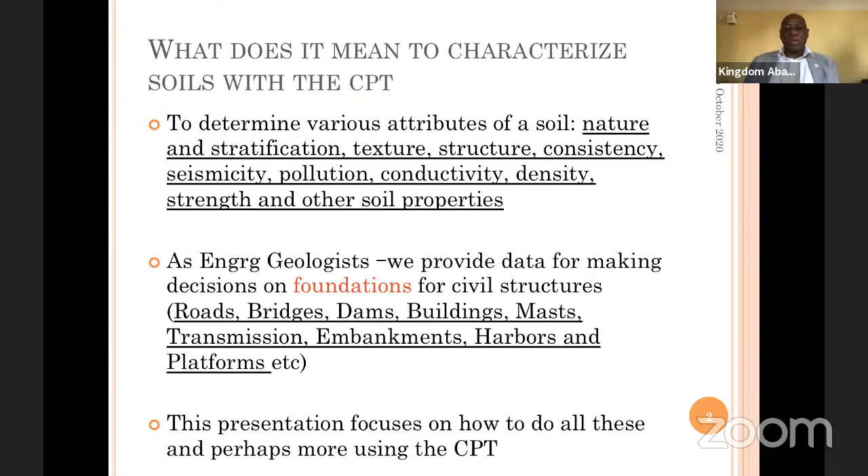Now, the cone penetrometer itself has evolved over time. The initial cone penetrometer was invented by the Dutch many years ago. It began with a 2.5 ton penetrometer. The tonnage represents the pushing capacity. The 2.5 ton evolved to 5 tons, to 20 tons, and today we have 40 tons. These tonnages reflect the push capacity as well as the uplift resistance.

Now, the initial cones that were first developed could only read the tip resistance, but subsequent ones, with evolution over time, better cones with better resolution and more flexibility in the probe and the parameters measured came on board. We were able to move on to register the cone tip as well as the sleeve friction, and then subsequently the pore pressure was added. Presently, there are cones that can read up to 7 or 8 different parameters.

The cone penetrometer and its advanced forms, such as the piezocone and the seismic cone, have extensive, wide-ranging applications. However, the applications are limited primarily to softer soils, but with increasing pushing capacity, they are now able to probe into stiff or very stiff soils and even soft rocks.

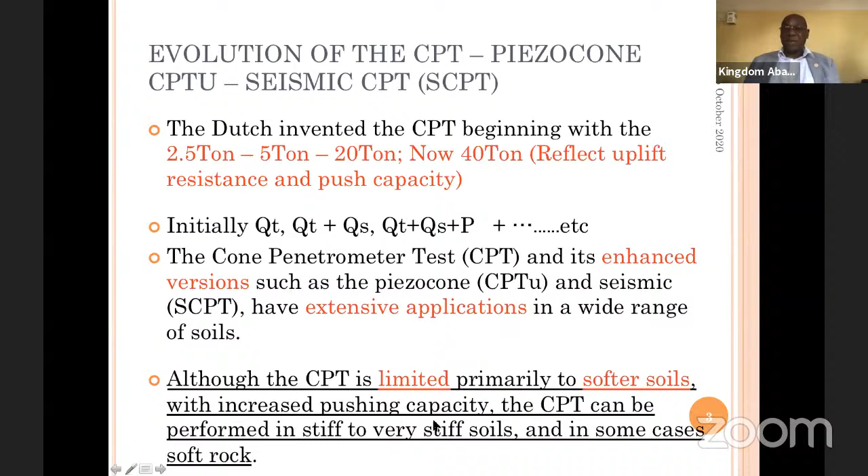Now, the cone itself, this is a schematic of a typical cone. It consists of a cone whose cone area is 10 centimeters square, as a cone tip whose angle is about 60 degrees. In Russia, they have cones whose cone angle is 90, and I think that differs. It depends on the manufacturer's own specification.

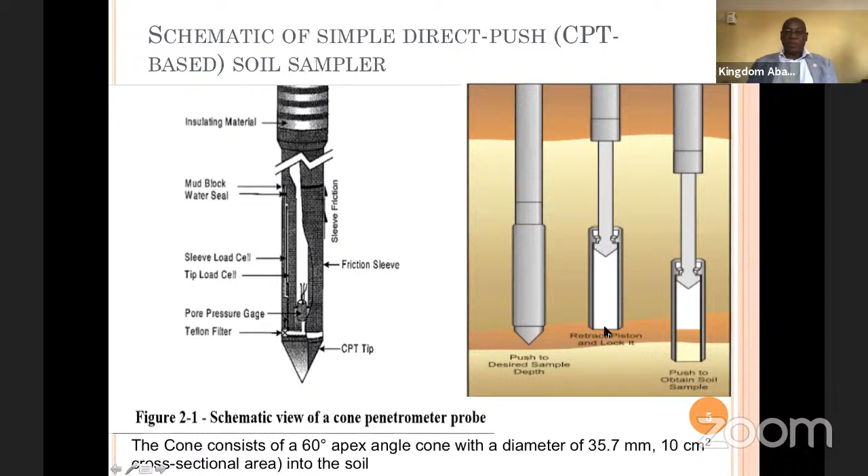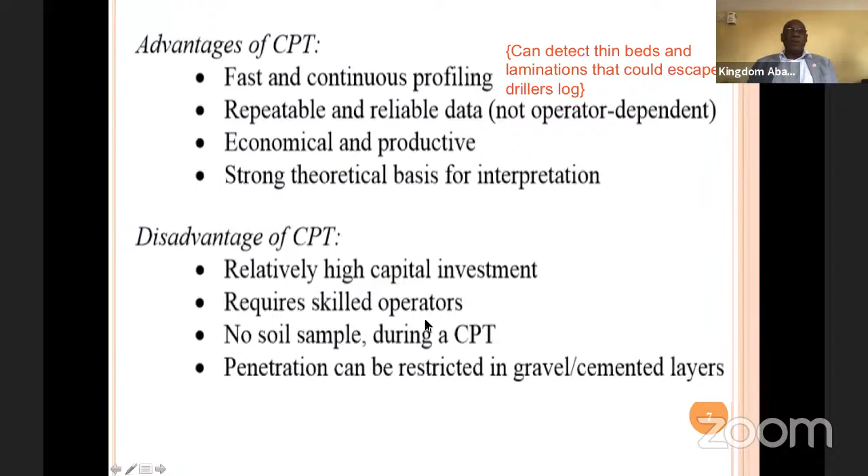Now, let me quickly go on to the test procedure. The cone penetrometer consists of the cone, the friction sleeve, and the sensor, and the data acquisition system, which I have shown graphically.

It is pushed down at a constant rate of 2 centimeters per second. The resistance of the soil at the tip, at the sleeve, and soil and pore pressure are recorded. Those are the major traits. Every electric CPT or piezo cone is able to register these 3 parameters. These are the primary parameters from which all other parameters are derived.

Today, we have several other sensors which can be fitted into a cone. You can have a thermometer fitted into a cone to register geothermal properties, temperature. You can have geophones or seismometers fitted into it to register arrival time of waves. I'll show further examples as to how that can be used and interpreted. You can also have pressure meters, cameras which rely on visible light to capture the state of things, resistivity, pH, oxygen, redox potential, and several others.

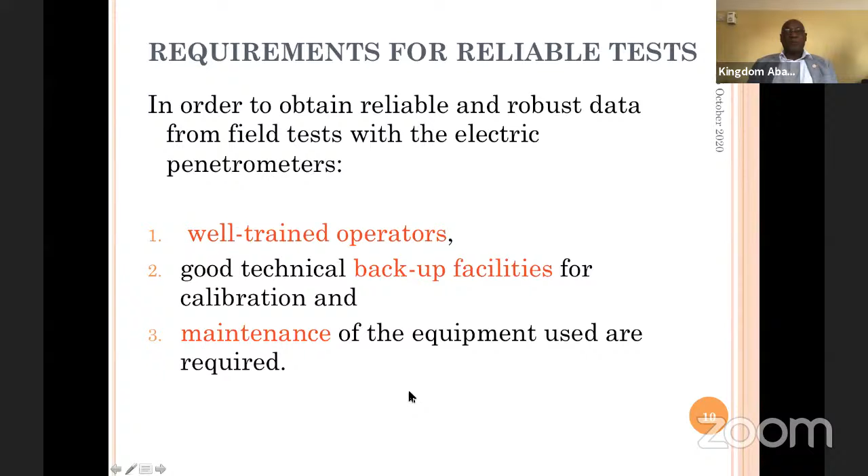Now, the requirements for reliable tests. First, you must have a well-trained operator. There is no alternative to this. You must also have backup facilities, and you must also have a proper maintenance profile.

You'll find that when a CPT probe or sounding encounters a very hard layer, you meet refusal to penetration. What do you do? It's wasteful when CPT encounters an unpenetrable layer at a very shallow level. There are two options open to us. The first is the pre-drilling option: when you encounter a stiff layer, you pre-drill, go beyond that layer, and then continue your sounding. It's possible that the thickness of the

Additionally, when you pre-drill, you create some kind of disequilibrium with the water pressure. This process requires that you fill the hole which you have pre-drilled with water, in order to ensure that pore pressure, you have piezo element saturation, to ensure that the pore pressure reading remains accurate.

There are cases where rather than pre-drill, you will have to use a dummy cone of a slightly larger diameter, such as I showed before, to widen the hole, and that will serve effectively as a friction reducer. Okay, now depth of penetration.

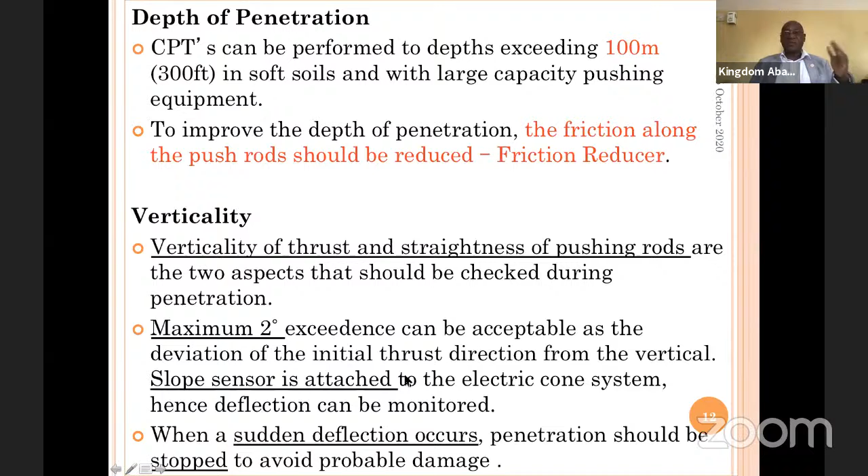Now, the rate of penetration is dependent on whether you are measuring pore pressure or not, because pore pressure needs time to equilibrate for you to get an accurate reading. So the sounding speed is actually 2 cm per second, that is 20 millimeters per second. If you are not measuring pore pressure, you have wider flexibility, plus minus 20 millimeters per second, plus minus 25 percent. But if you are to measure pore pressure, you have a stricter window of 10% to operate with.

Now, to avoid the effect of pore pressure dissipation, sounding has to be continuous. When you pause in sounding, pore pressure dissipation occurs, which means that if you're not sounding continuously, the pore pressures you're obtaining may have some difficulties.

Now, frequency of sounding: you have to take account of the interval. If you want to capture the properties of thin layers of soil, then your interval of data capture must be smaller than the minimum thickness that you have to capture.

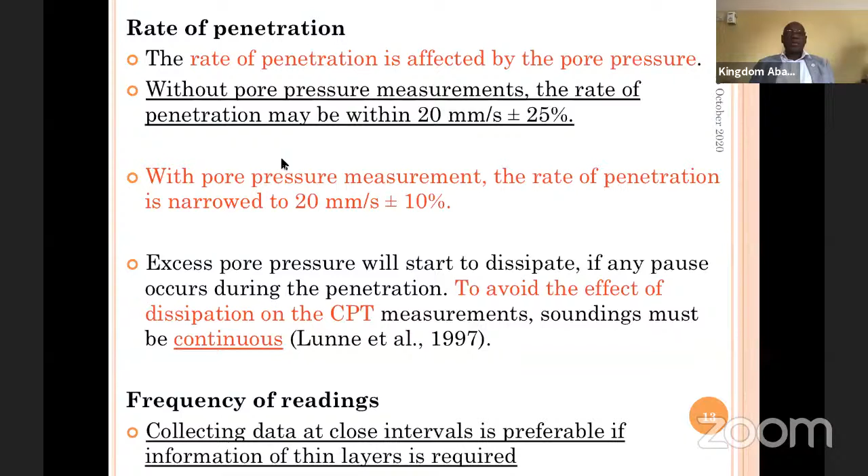Data acquisition using the CPT essentially gives you cone tip resistance, sleeve friction, pore pressure. Your electric CPT, your piezo cone, also captures verticality, and you also have the ability to capture shear wave velocity, conductivity, and several other probes, as long as they are implanted on the probe. The number of readings taken must be adequate to obtain the data.

Now, using the 2.5 ton equipment, data has been presented more like a table, which doesn't really give you much information. You have depth, cone tip resistance, and then the total cone, including the tip as well as the sleeve. This hardly conveys any information using the 2.5 ton, for example.

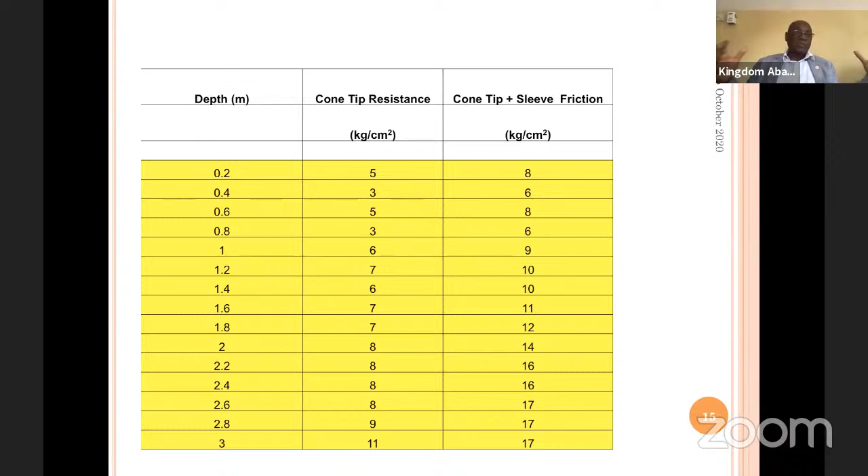This presentation is about optimizing the 2.5 ton, which has been found very useful, particularly in areas of low infrastructure penetration, where you hardly have roads, and yet you have to take the equipment to the appropriate site and run the test. Now, how do you present data using this kind of information?

Of course, you would plot your pore pressure versus depth. You can also plot your sleeve friction versus depth. There are graphical ways in which this can be done. You can also have your differential pore pressure versus depth. Basically, a data presentation in CPT would look something like this.

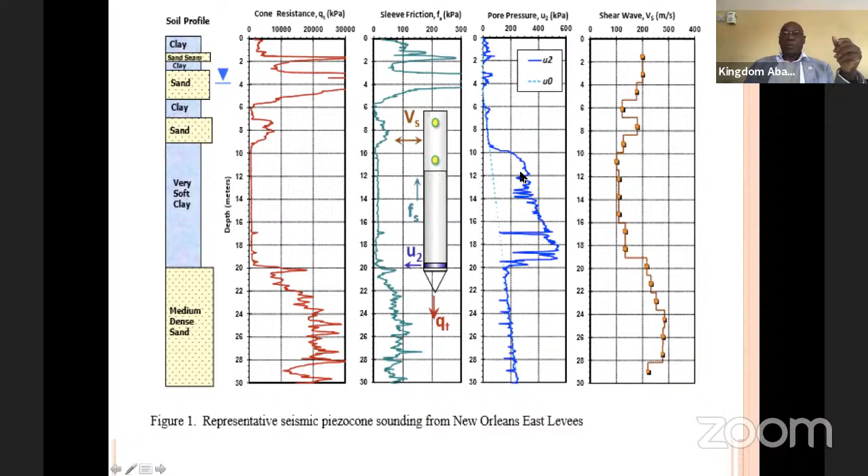The methodology for the seismic cone is fairly simple. In the case of a seismic cone, you have your cone sounding here. You have an energy source generated with a hammer connected to the trigger, from a fixed distance to the probe, to the cone. When you sound to this level, you trigger the sound.

The energy is transmitted, and because the cone has a listening device, a seismometer, it records the arrival time. You know the distance from the source to the cone, and you also know the depth, so you are able to calculate this distance. Knowing the arrival time, the travel time of the signal, you are able to determine the shear wave velocity.

This helps you to determine your shear modulus, and from the shear modulus, you're able to determine your dynamic modulus. Prior to the development of the seismic cone, shear modulus was determined essentially by drilling two boreholes: in one borehole you put a source, in the other you put a listening device—that's the crosshole seismic method.

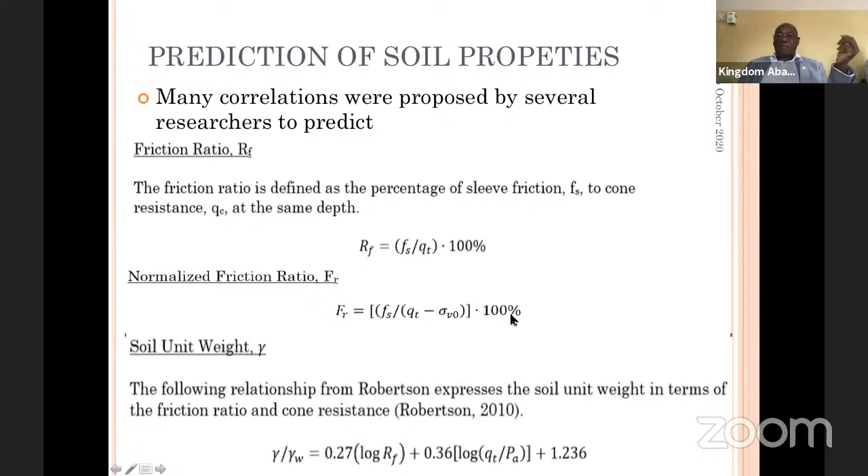You can also determine unit weight, essentially by this relationship developed by Robertson, 2010. In this graph, for example, there's a relationship between sleeve friction and unit weight. This correlation involves over 1,000 samples, with a coefficient of determination of about 0.6. Different soil types have been embedded into this, with different colors representing different soil types. There's a linear correlation here, and also one that is more curvilinear, so different degrees of reliability. Okay, moving on.

How are you able to identify the soil in a cone penetrometer test, and how does that come into the picture? In 1965, Begemann evolved a way of characterizing the soils encountered by the cone penetrometer, using essentially friction ratio.

The reason is that if the friction ratio is between 1.2% to 1.6%, that soil is most likely to be coarse sand. And if the friction ratio is between 3.2 and 4.1%, that soil is either clay or loam, loamy soil especially. And for peat, you have friction ratios that are greater than 7%.

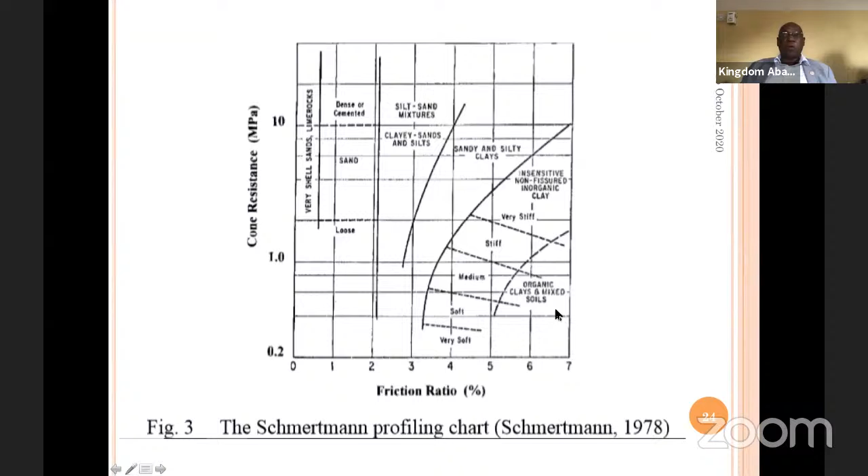Now I'll move on to the soil behavior type index. This index is thought of as a representative when you combine the cone resistance and the friction ratio. Robertson 1990 produced some concentric circles which corresponded with the different soil types, which he tagged the soil behavior type index, given numerically by this expression. These are like concentric circles. I won't dwell, because of time, I'll move a little faster.

Now, using the method, here is a comparison of the methods: the soil classification using Robertson and the improvement they made in 1990 against that of 1986, and the common soil behavior types registered against it. Perhaps spend a little more time when the slides are forwarded.

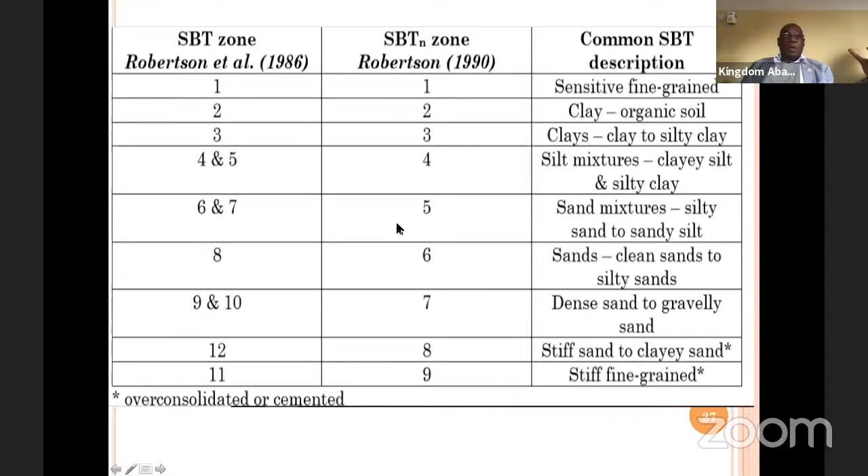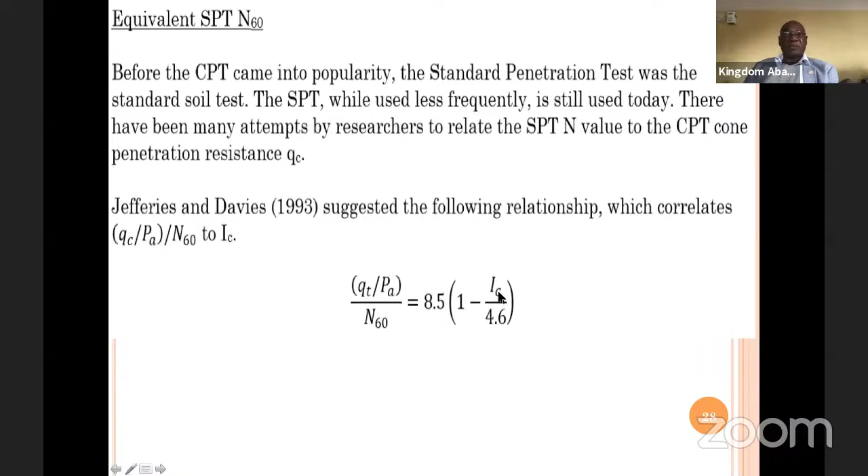Now, Jefferies and Davies in 1993 introduced the elements of standard penetration test, that's the SPT, which has a much longer history than CPT. They integrated the CPT results with the SPT together with the soil behavior type index to arrive at some soil classification, which he then compares with Robertson 1986. Using the elements of SPT, SPT-N60, you have the different soil types identified here corresponding to the soil types developed by Robertson 1986.

You can achieve further improvement by expanding the parameters used for determination of different soil types. Shear wave velocity can be determined empirically in two different ways. Much of the predictions made by CPT are empirical, based on some theoretical background.

For example, Robertson 2009 gave this expression for the prediction of shear wave velocity, in which this coefficient is given by this. Mayne, in 2006, also determined shear wave velocity using this relationship. I think the preference depends on conditions under which they can be applied, depending on the environment in which the field sounding of the CPT is carried out.

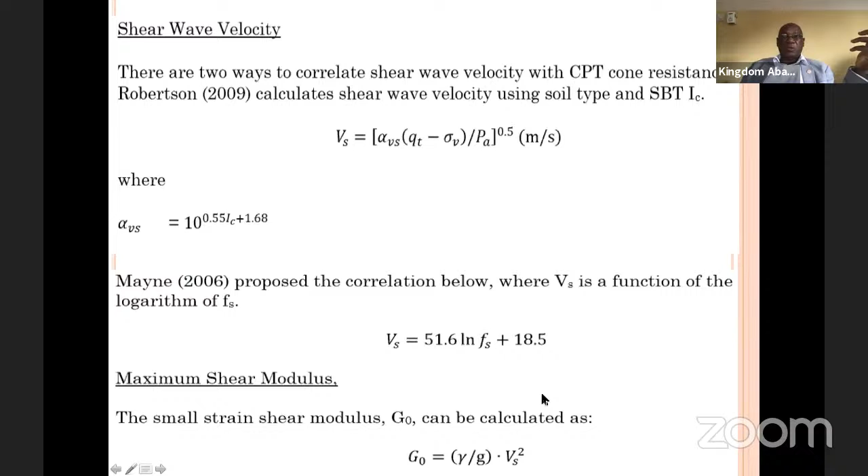Shear modulus essentially is just fitting the shear wave velocity you have determined from the CPT into a petrophysical equation. In this equation, G0 is your shear modulus, so to say.

Hydraulic conductivity can be determined to a less reliable degree. Even so, for conditions where the soil behavior type index, SBTI, is less than 3.27, you can use this. For all other conditions, where the soil behavior type index is more than 3.27, you can use this.

In fact, last year in Korea there was a further development which gave much higher reliability of using the CPT to determine permeability. The science is evolving, and the reliability of prediction is increasing with further research.

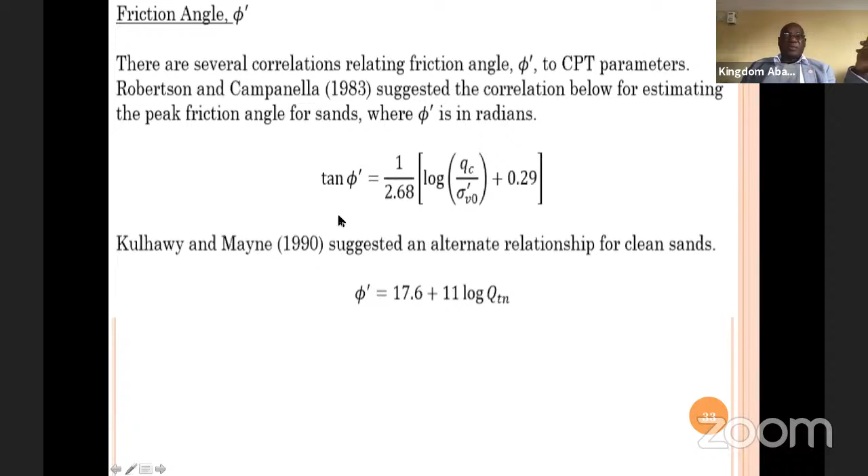Relative density was predicted by Jamiolkowski in 2001 using this relationship. I have to move pretty fast.

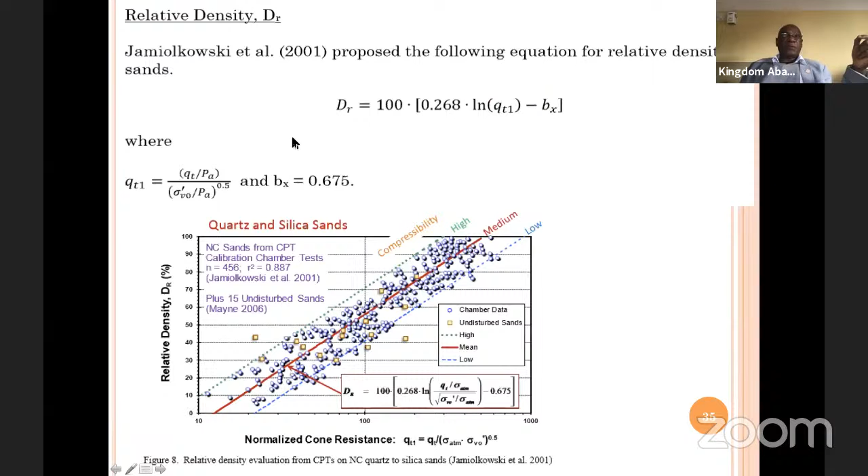We have gone further to look at how best to predict shear strength. In this relationship, you have undrained strength plotted against tip resistance for both mechanical and electrical cones, and you'll see that there is significant fit, with a coefficient of correlation of 0.92. I would consider the 193 samples.

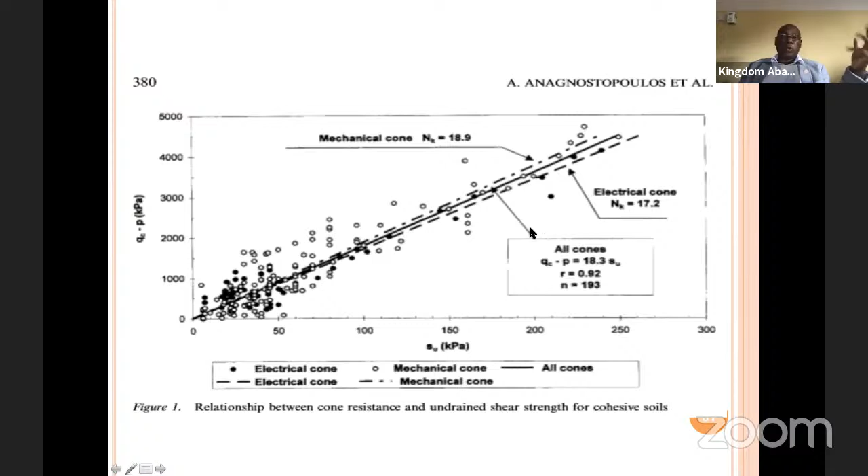In this relationship, the slope of the graph is essentially your cone factor. For mechanical cones, the cone factor is 18.9, whereas for electric cones, the cone factor is about 17, which means the electrical cones showed more sensitivity, so to say.

Now, for soil sensitivity, the sensitivity here is a ratio of the undrained strength against the sleeve friction, which is the remolded strength, more or less.

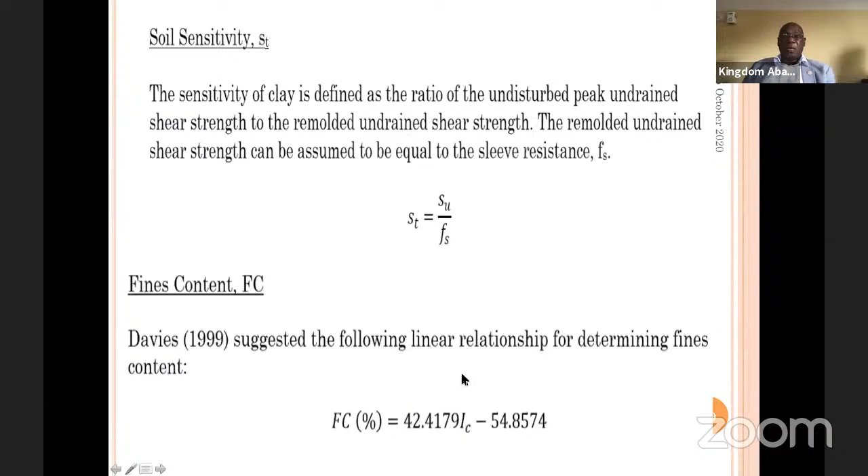You can also use the CPT to determine the fines content using the soil behavior type index, SBTI, giving an estimate of the fines in the soil. You even have Young's modulus, which is determined in this way.

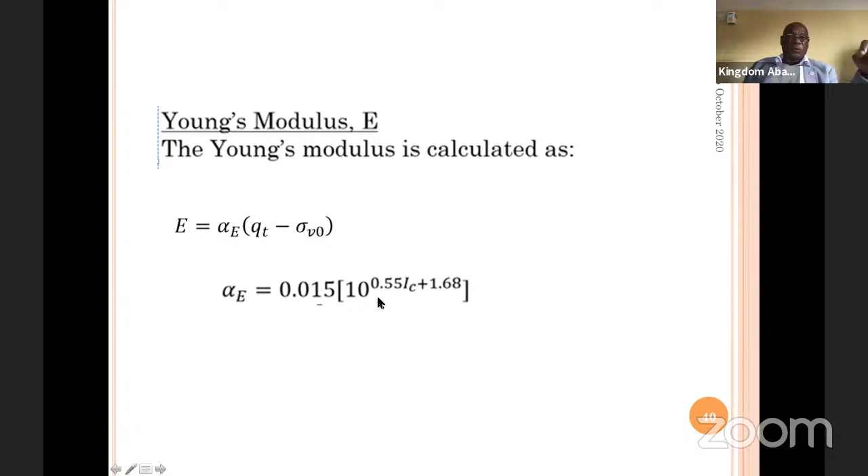Here you have that the cone tip, you subtract the overburden pressure from the cone tip multiplied by this coefficient, which is given by this, and the soil behavior index is also a parameter here, just as you have this. So the cone penetrometer parameters are increasingly coming up for many parameters. It means that because they are there, knowing their value, you can retrospectively determine those parameters.

Even for California bearing ratio, CBR, which is a parameter required for road sub-base and subgrade, the CBR is related to allowable bearing pressure, which is related to the undrained strength, which can be determined from the cone penetrometer. So using the cone penetrometer by extension, you can determine your CBR to some degree.

Additionally, from the cone penetrometer you can also determine, to some degree - it may not be highly reliable - your mean particle sizes. This is the work done by Robertson et al. 1983, and you can see the degree of correlation here. It's as high as 0.82.

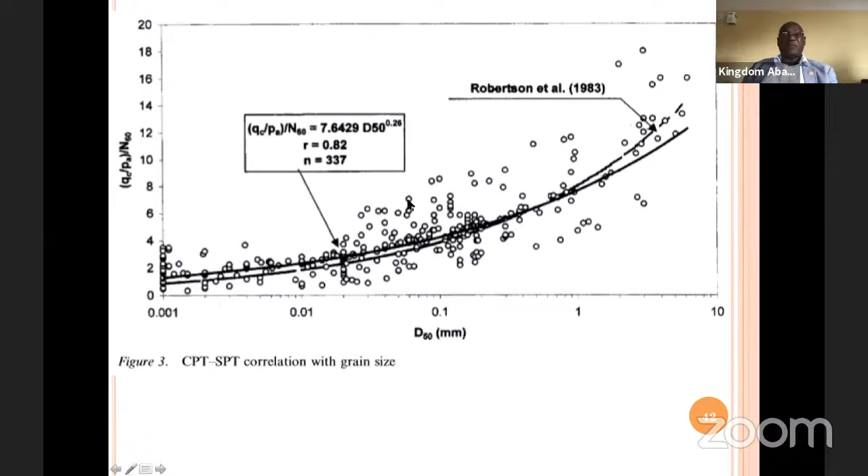So if you have your friction ratio, you can predict your particle size distribution to some degree. You can determine your mean size, not all the particle size parameters. And soil compressibility, which is...

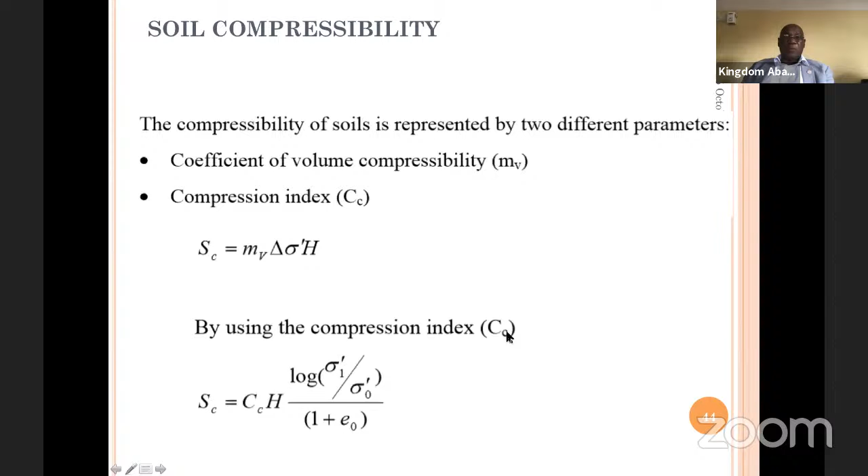essentially knowing your coefficient of volume compressibility or your compression index, you're able to determine settlement using this equation, which if you have used the compression index, the equation will transform to this essentially.

And using the constrained modulus, which is the parameter determined by the CPT, the constrained modulus is just an inverse of the coefficient of volume compressibility. So if you feed it into that equation which I have shown earlier, just by replacing this with the constrained modulus, you are able to also obtain a settlement.

This is the stress increment. This is the thickness of the compressible layer you are considering. So there are different methods to estimate compressibility settlements.

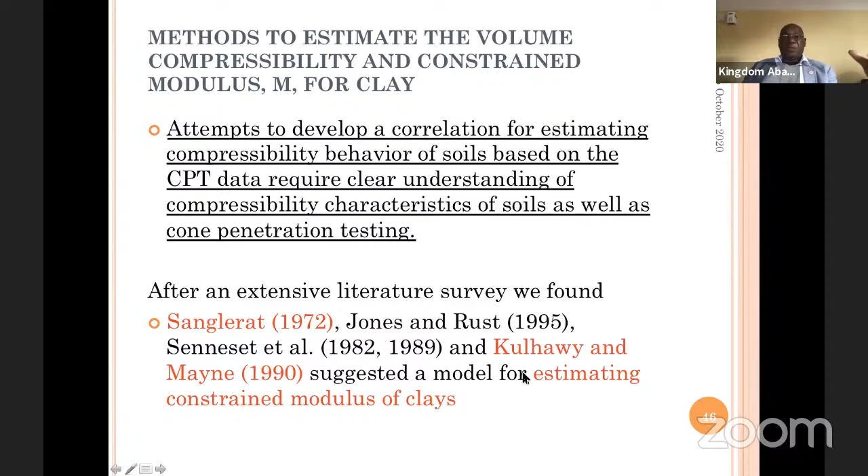So if you know your cone tip resistance, you're able to select your appropriate coefficient, and you can get your constraint modulus. The constraint modulus can also be determined using this relationship, and this is by Kulhawy and Mayne. It's also a very simple linear relationship.

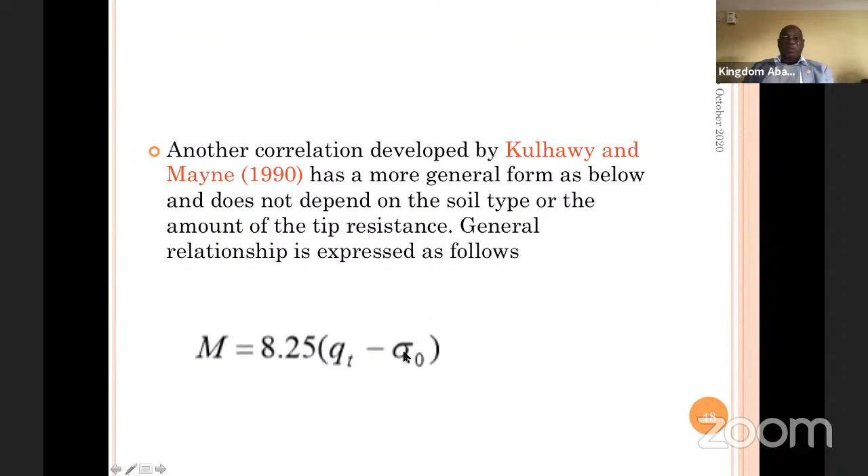In this relationship, this is your overburden pressure. You can also determine your coefficient of consolidation in the horizontal direction because the cone penetrates horizontally, and you're able to determine this, and this determines the rate of settlement to some degree.

Now, how is all of this applied? First is the application for bearing capacity. You're all familiar with the Terzaghi basic bearing capacity equation, which gives you this.

Here, the thing here is your undrained cohesion, which you can determine using the CPT by this relationship. Here, the N is the cone factor, and if you have undrained conditions, it means that your bearing capacity factor gamma here is going to be 0. So you are just considering these two parameters essentially.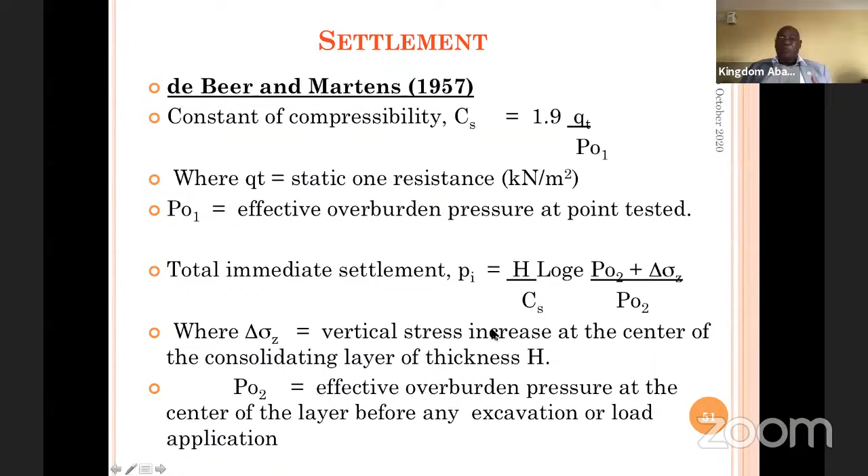So essentially, you can retrofit this into the equation for settlement, and then in place of the compressibility, you can substitute this, and then you integrate it across the depth of a sounding, and in that way, you're able to obtain your settlement computation. I'll show you the example.

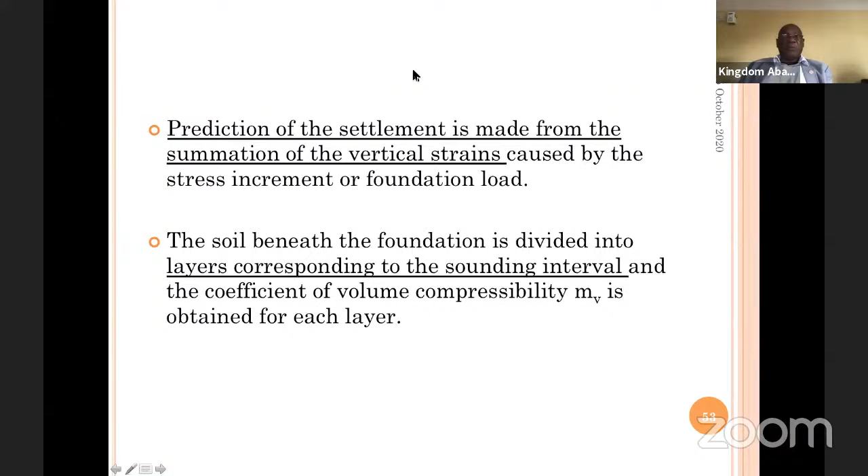If you have used the 2.5 ton penetrometer, you'll recall that it does not have a pore pressure cell, so you don't measure pore pressure. However, you can assume hydrostatic pressure distribution from the point at which the groundwater table is encountered. For us that holds true because artesian conditions in the delta are very few and far between, except for much deeper horizons where you're concerned with water supply. But basically, most of our hydrostatic conditions follow normal hydrostatic pressure distribution.

Using these parameters and the 2.5 ton penetrometer, I have this case history to report, where you have tip resistance, sleeve friction, a friction ratio, and the indicative soil behavior type. This is using conditional formatting on Excel. These things are generated using Excel.

Using the relationships I've shown, you're able to generate a profile of the sounding for the undrained strength. You're able to generate your allowable bearing pressure if designing for foundation, your unit weight profile with depth, your angle of internal friction with depth, and determine your settlement distribution.

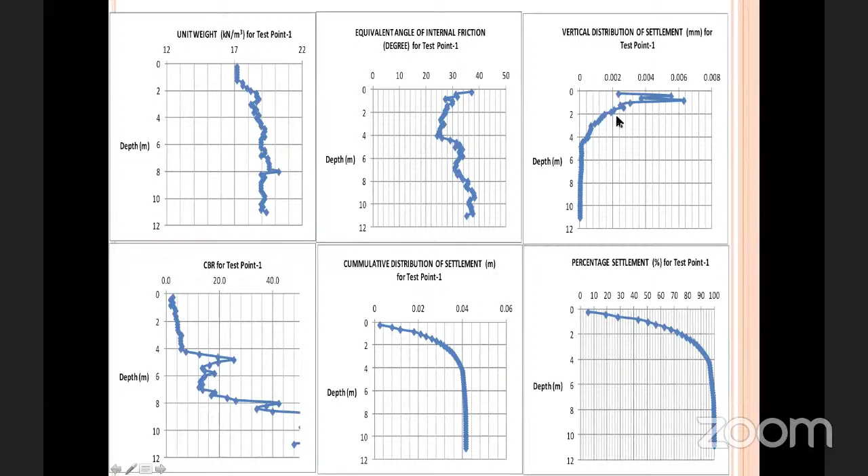Now, Professor Abam, conclude. Yes, I'll conclude shortly. This is very interesting because here you are able to see that so much more settlement is contributed.

For the different methods of settlement computation, I have done a comparison to show that any of the methods can be used, but there are margins of error. Here also I've looked at the stress distribution from a load on the surface of the ground. This will give you the stress distribution against allowable bearing pressure, and this can help you determine the depth of embedment of your shallow foundation.

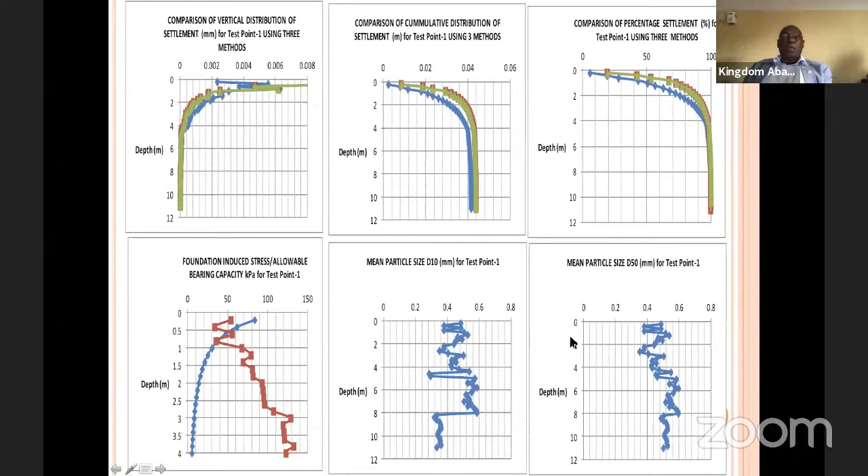For particle size distribution, these have been shown. This is a scenario where you have 1, 2, or 3-story buildings. The stress induced by these buildings is given by these lines, whereas the allowable bearing pressures are given by these other lines for different factors of safety. This helps you choose, depending on the factor of safety you want to operate with, and it helps you choose your depth of foundation.

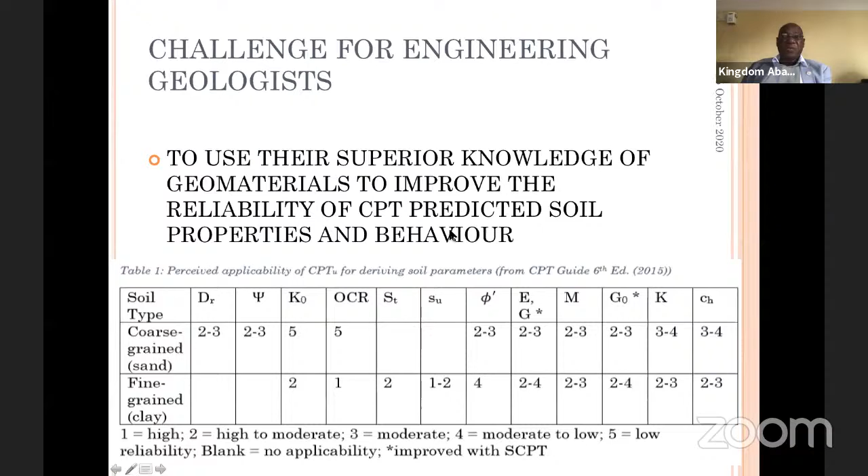Now lastly, I want to say that as engineering geologists, we come to the table with a superior knowledge of geomaterials to improve the reliability of CPT prediction. If you look at the table I showed earlier, you find that the CPT is predicted to less desirable levels of accuracy. Moving forward, I would request that younger generations of engineering geologists pay attention to using their superior knowledge of geomaterials to increase the reliability of CPT prediction of soil properties for these areas. Thank you very much.

Yeah, thank you, Professor Abam. That was really interesting, a really nice presentation with a lot of information and a lot of analysis that you're providing.

Let's have 1 minute to see if there are any questions and we can move on. One question I would like to point out is about the versatility that you mentioned. Did you try to quantify the versatility compared with the two points you mentioned? I think it was kind of in the beginning. Say it again, I mean you mentioned once something about the versatility of the cone penetrometer.

Did you try to quantify the difference it makes if there is a standard deviation of 2 points? Of standard deviation of 2 points. You mean the versatility, or are you talking about the deviation? The deviation, are you referring to the deviation or the versatility? The deviation, you mean? Yeah, exactly.

Yeah, there are, in fact, the allowed deviation is 2 degrees. However, the deviation is not part of the computation. It doesn't help you in doing any computation. It's only for the safety of the machine, for the safety of the rod, because at higher degrees of deviation, you stand the risk of snapping. The rods might break, and you might lose your cone and several rods and damage the system. So it's essentially to protect the system.

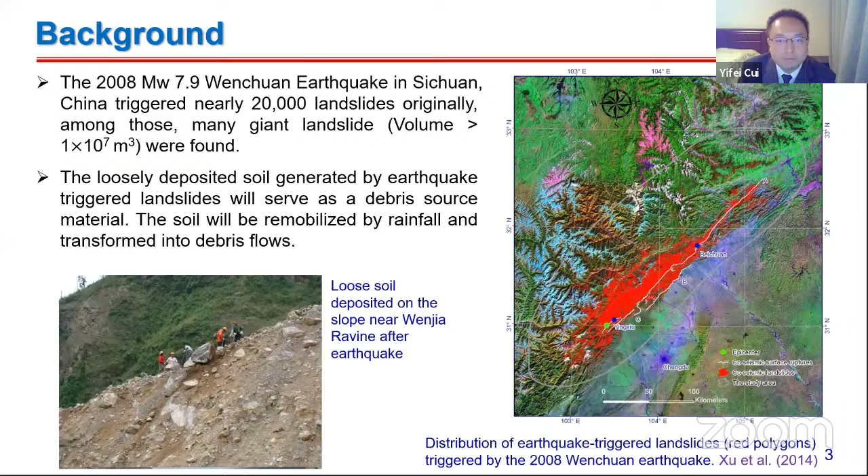One typical geological hazard example is the large debris flow initiated by heavy rainfall in Wenjia Ravine, Sichuan Province in 2010. The landslide deposit after the earthquake had a volume of 81.6 million cubic meters, with deposition depths from 20 to 180 meters. On August 13, 2010, after several days of heavy rainfall, a debris flow was initiated. During transportation, the debris flow entrained the loose slope deposition, with a maximum channel incision depth of 50 meters.

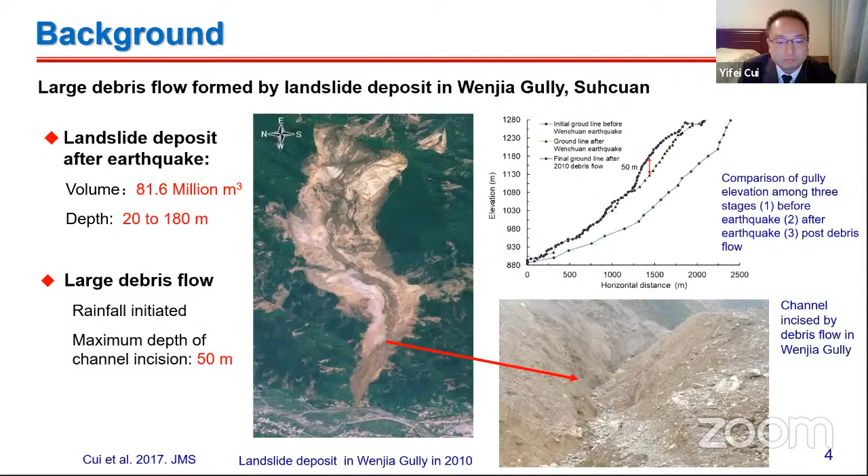Here is the disaster chain - we can see that over 20 debris flows appeared in Qingping town at the same time, which resulted in 12 fatalities, 300 houses destroyed, and 2 bridges destroyed.

Field observation shows that the soil has a wide graded size, with particle sizes ranging from 0.01 millimeters to meters, unconsolidated and with non-uniform pore structure - essential the source material for debris flow. It is widely found in gullies and slopes in mountain areas of southwest China. Large particles usually form a framework structure while small ones fill in the pores. Field observation also indicates that during rainfall infiltration, fine particles may be carried away by seepage force, which is known as internal erosion.

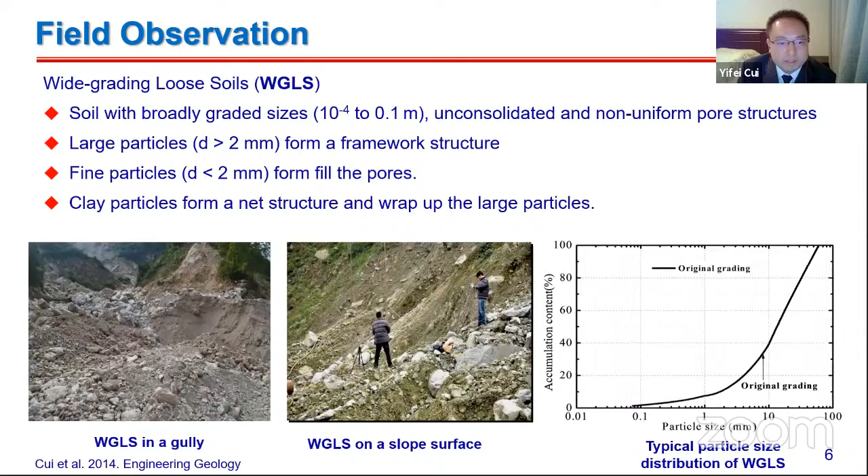During the test, we used monitoring sensors to measure the volumetric water content at 6 different locations on the slope. At the end of the test, we also conducted grading analysis of the soil from 3 different locations.

One of the most important things we wanted to identify is the direction of fine particle migration. Here we use particle grading analysis at different locations on the slope. You can see the content of fine particles after the test is higher than at the initial stage. We consider this an indication of the fine particle migration direction, and the fine particles accumulate at the slope toe.

To further prove this, we also conducted particle grading analysis of samples taken from 3 different slope locations after the experiment. You can see there's a general trend that the fine particle content is higher at the slope toe.

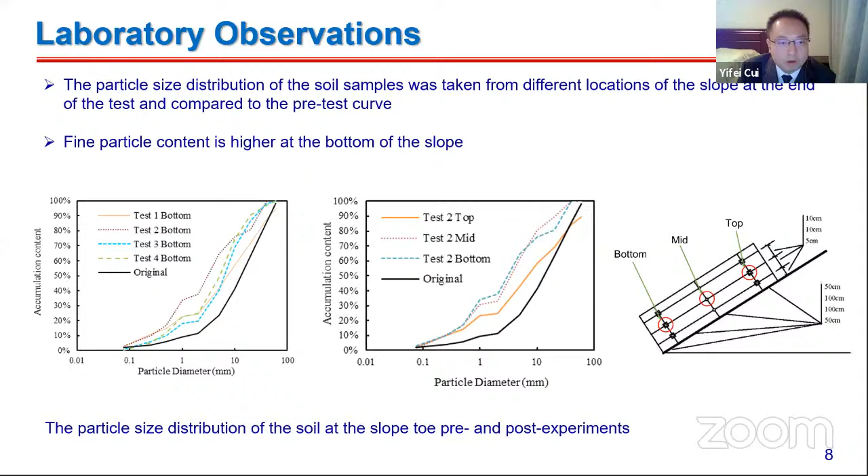We use the front side and side video cameras to record the whole failure process. After the data interpretation, we mainly divide the whole failure process into 3 stages.

In stage 1, the increase in water content in pores and fluid flow caused the fine particles to start migrating. The enlarged pore provides better space for the fine particles, even for coarse particles, to migrate. The accumulation effect of the fine particle migration changes the structure of the skeleton grains, which reduces the skeleton stability and induces a small collapse locally.

In stage 2, some soil pores are blocked by migrated fine particles. The fine particles accumulate at a certain layer and form a relatively impermeable layer, which causes the pore pressure to increase and the soil strength to decrease. This is also verified by the pore pressure measurement data.

In stage 3, the equilibrium state will be broken. Thereafter, the same effect may induce another collapse, and a similar process may happen continuously. So this kind of domino effect would make more fine particles flow out and finally lead to the whole slope failure.

From the experimental study, we know that the whole picture of the failure includes 2 stages. The first is internal erosion, and the second is the combination of internal erosion and surface runoff. So the current research focuses on the investigation of the first stage mechanism.

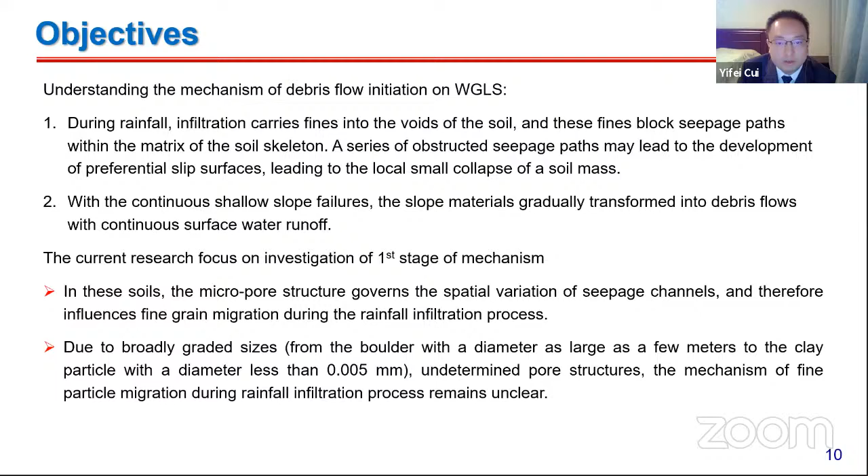In these soils, the micropore structures govern the spatial variation of the seepage channels and therefore influence the fine grain migration during the rainfall infiltration process. Due to the broadly graded size and undetermined pore structures, the mechanism of fine particle migration during rainfall infiltration remains unclear.

Before we go to the next step, I would like to review a little on the previous research of numerical analysis on the internal erosion phenomena of non-plastic soil, from the perspective of continuous, discrete, and both. There are 2 fundamental frames for describing the physical governing equations: the Lagrangian description and the Eulerian description.

The Lagrangian grid is fixed to or attached on the material throughout the entire computational process, and it moves with the material. One typical example is the finite element method. The Eulerian grid is fixed on the space in which the simulation object is located and moves across the fixed mesh cells in the grid. One typical example is the finite difference method.

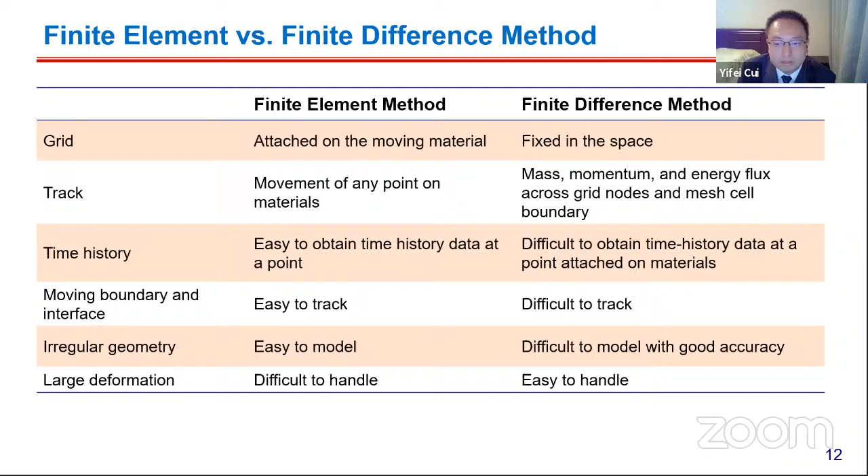Here is the comparison between FEM and FDM. For the finite element method, it performs well in solid deformation problems, while large deformations such as fluid flow cannot be well simulated. For the finite difference method, construction of complex geometry is never an easy task, and it cannot solve problems that need monitoring material properties in a fixed volume.

So what we actually need is a method not based on the grid, allowing the internal structure to be more adaptive and robust. So here comes the mesh-free method: smoothed particle hydrodynamics.

There are 6 key ideas in the SPH method. The first is mesh-free, and the second is integral function representation by kernel approximation. Then comes compact support, adaptivity, and Lagrangian, which means that the particle approximation is performed related to the field functions. And dynamic state, using an explicit integration algorithm to obtain the time history of all the variables.

The formulation of SPH is often divided into two key steps. Step one is the kernel approximation: the function is approximated by summing up the values of the nearest neighbor particles, converting discrete particles to continuous by integration. Step two is the particle approximation, which makes the SPH method simple without using a background mesh for numerical integration. For general dynamic flow, SPH is applied to the Navier-Stokes equations or Euler equations.

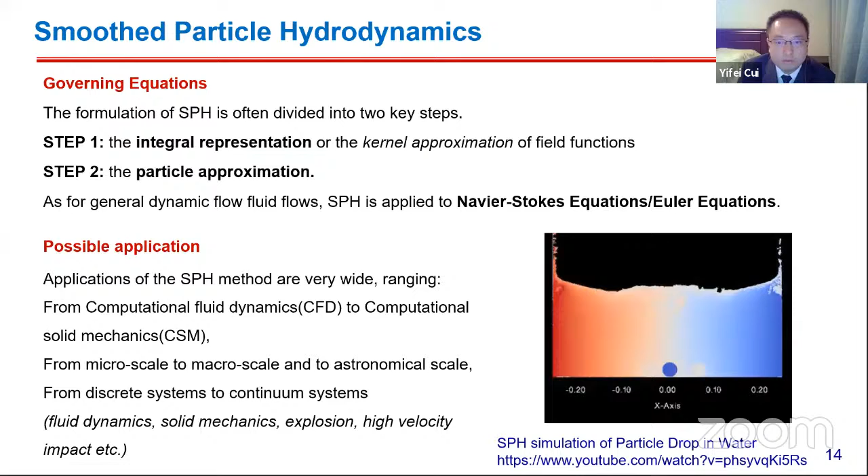The application of SPH has a wide range, from computational fluid dynamics to computational solid mechanics, from micro scale to macro scale, and from discrete systems to continuous systems.

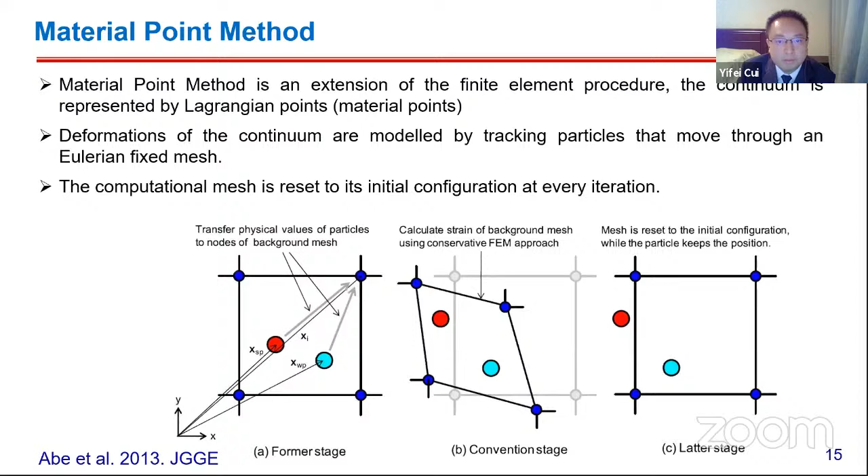Here is another method, called the material point method. It is an extension of the finite element method, and the continuum is represented by Lagrangian points, called material points. The deformation of the continuum is modeled by tracking the particles that move through an Eulerian fixed mesh, and the computational mesh is reset to its initial configuration at every iteration.

At the beginning of the time step, information is transformed from particles to the computational mesh to initialize the discrete equation of motion. The mesh is used to determine the incremental solution of the field equation in Lagrangian fashion. At the end of the time step, the solution is mapped from the computational mesh back to the particles to update their information.

Here is the summary comparing SPH and MPM. Both are mesh-free methods. MPM also has some grid, but it is only used to calculate gradient terms. They can both be used to handle irregular geometry and large deformation, but limitations also lie in the balance between computational efficiency and accuracy.

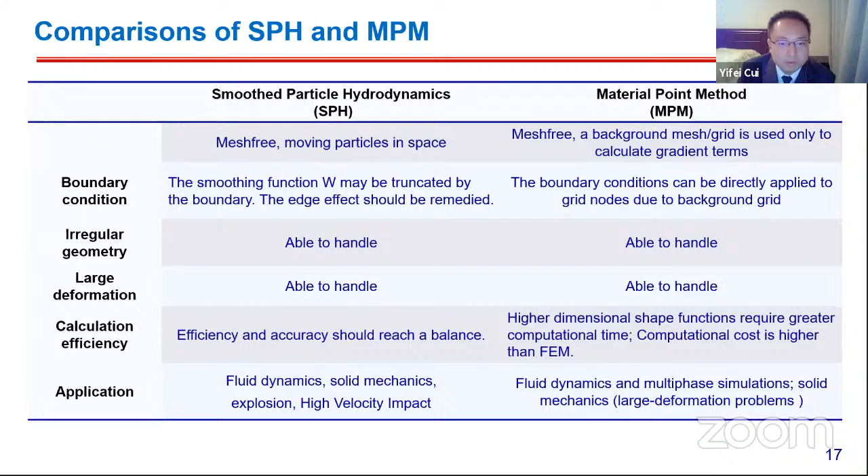Another limitation of SPH and MPM is that they cannot deal with soil with wide particle size distribution. This can be solved by the discrete element method.

The DEM treats particles as independent of one another, interacting only at contact between particles and the boundary. The motion of each discrete element is calculated from the force acting on it using Newton's law of motion, and the displacement and rotations of the discrete element are computed as the calculation progresses. New contact and complete detachment between discrete elements are recognized automatically.

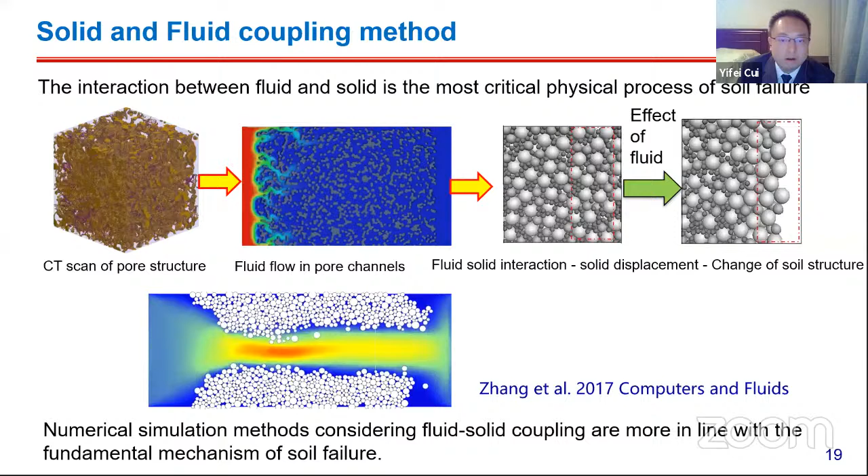As we know, dry DEM is not able to simulate fluid flow in pore channels, and the interaction between fluid and solid is the most critical physical process of soil failure. So numerical simulation methods that consider fluid-solid coupling are more in line with the fundamental mechanism of soil failure. I will first talk about solid and fluid coupling in the MPM method.

Here, the balance laws are applied for soil and water points separately. Each material point has its individual motion, which is tracked in time due to the Lagrangian description. The solid skeleton and water material point located at the current configuration might have been located at different locations in the reference configuration. In this formulation, the momentum balance equations are solved to obtain the accelerations of the solid skeleton and the fluid phase.

The momentum exchange term is considered in the fluid momentum balance equation. A lot of researchers have been working on the development of solid-fluid coupling techniques using the discrete element method. An overview of this approach can be divided into three categories.

The first one is DEM coupled with computational fluid dynamics. The governing equations of the fluid calculation system are the continuity and Navier-Stokes equations. Fluid-solid interaction force is applied to the solid particle by drag force. One difficulty with this approach is that the solution of the mass balance and momentum equations is computationally demanding.

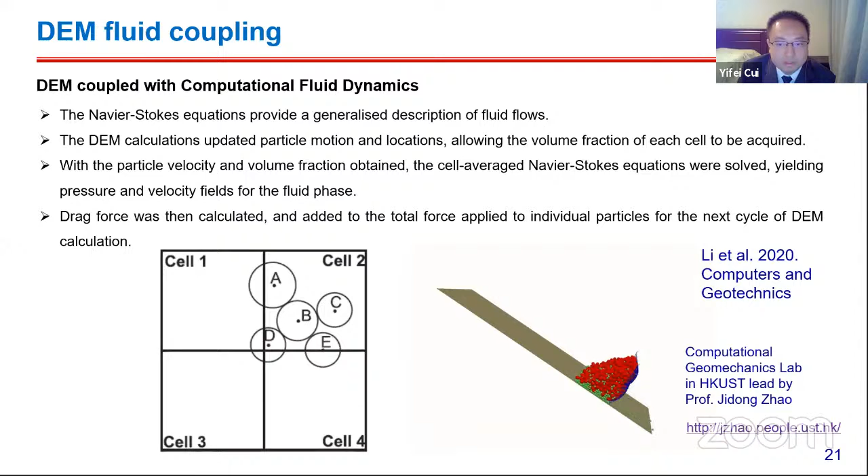The second division is DEM coupled with the lattice Boltzmann method. Here, the fluid is presented as packets of mass that move on a regular lattice, with propagation and redistribution of fluid packets occurring at the lattice node according to conservation of momentum. The coupling of LBM and DEM is accomplished through a moving solid boundary condition, and the fluid-induced force is calculated by summing up the momentum transfer that occurs over all the nodes covered by the solid element. The total computational cost could be substantial since a fine lattice is necessary and small time steps are required.

The last one is DEM coupled with solid deformation and pore pressure. The pore pressure change is calculated from pore volume change, and pore pressure force on the particle is applied by an integration method of pore pressure difference at the adjacent center of the pores. However, the computational efficiency of such methods still needs to be improved.

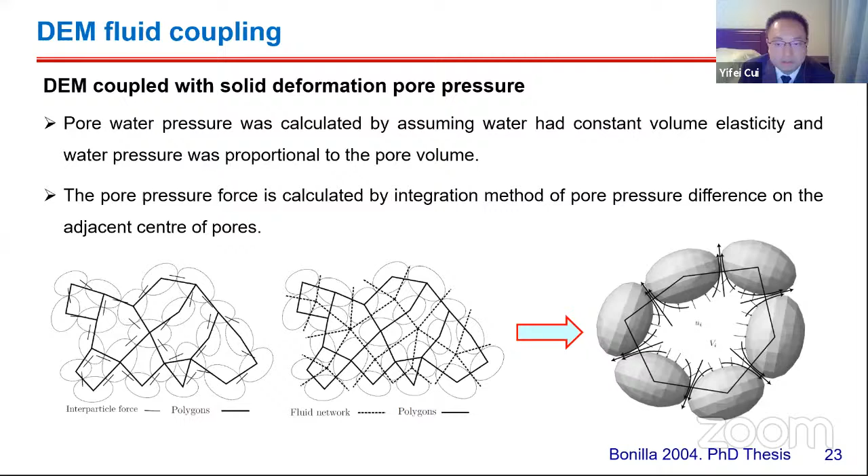I will first start by talking about the categories of solid-fluid coupling analysis before I introduce the development of the coupling schedule. The first one is the hydrostatic pressure of the fluid and buoyancy. When the particle is simply submerged in the steady fluid under gravity, the only force that the fluid adds to the particle is the buoyant force.

The second one is low solid concentration flow. If the particles move independently of each other and only occupy a small fraction of the fluid volume, viscous force is applied to each particle, and the presence of the solid has no effect on the fluid flow.

In the case of high solid concentration, not only will the fluid flow contribute drag force on the particles, but the particles will also have an effect on the fluid flow. Here, the permeability can be calculated from the DEM, and it will be used in the fluid flow calculation using the continuum approach. This coupled approach is able to capture mechanisms such as internal erosion.

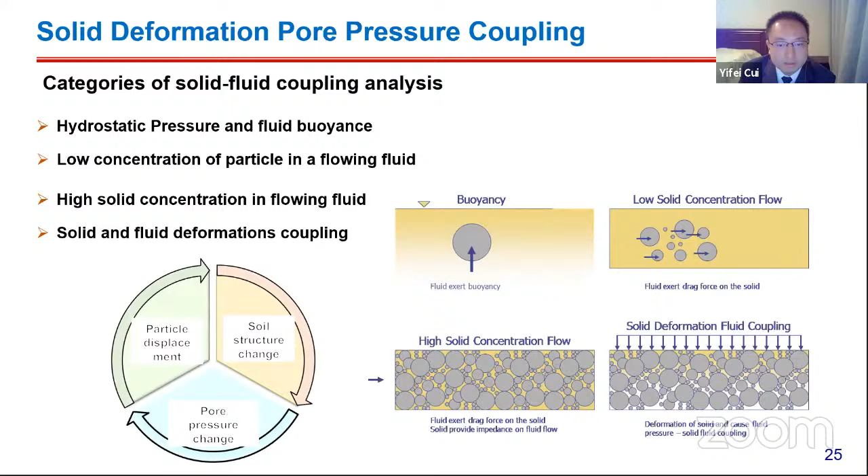The last one is solid fluid deformation coupling. When soil or rock is fully saturated with fluid by impermeable layers, compression on the outer boundary will cause the void space to decrease, resulting in an increase in excess pore pressure. The increase of excess pore pressure will cause displacement of the solid particles, and the movement of the solid particles will change the void space occupied by the fluid. An example is the consolidation problem in soil, and large displacements caused by liquefaction in sand during earthquakes.

So we first start with the pore pressure generation process for the solid-fluid coupling procedure. When the sample is subject to isotropic compression, the solid particles are considered incompressible. However, the intersection of particles at contact is allowed in order to model the reduction of the volume of the void. The pore space volume change can also be calculated. When the material is fully saturated, the volume reduction in pore space will cause excess pore pressure to build up.

Therefore, we introduce the water element in the DEM simulation. Compared with the specific solid element, the water element is assumed to have the same center position and radius. The water particle deforms together with the solid element, meaning the same deformation at each contact is calculated compared with the solid particle. The pore pressure generated from the deformation of the solid particle is now considered as an outer boundary pressure on the sample that only considers the water particle.

The water element stiffness is then calculated related to the change of pore space and the compressibility of water. In relating the pore water pressure in a water element to the contact force acting on the water element, the pore pressure can be related to the average mean stress due to the water particle contact forces. Since the water particle has zero shear stiffness, the only unknown is the normal stiffness of the water particle.

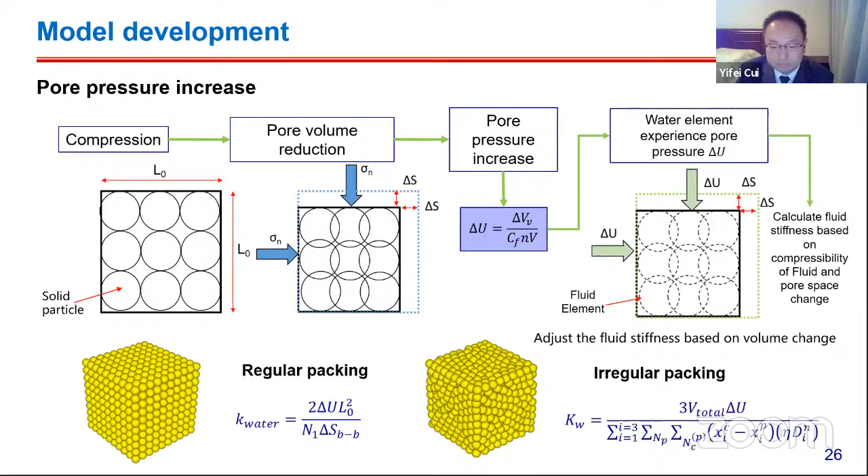The pore pressure in an undrained sample is averaged along three principal directions. The water particle stiffness is then calculated using the average method. During the water diffusion process, the effective stress is carried by the solid particle, and the pore pressure is carried by the water particle. During this process, the total stress on the outer boundary wall is maintained the same, and the solid stiffness remains unchanged. However, the volume of the total sample decreases due to the drainage of some pore pressure. The DEM simulation reduces the water particle stiffness by a certain amount to maintain an expected volume reduction.

We consider two particle packing configurations in the pore pressure dissipation simulation. First, the regular particle packing configuration with uniform particle size is considered for 1D consolidation, where force between particles is only transmitted in the vertical direction along the z-axis. Therefore, during the drainage dissipation process, there is no force acting on the side walls in the x and y directions.

During consolidation, the pore pressure can be linearly related to the particle contact force calculated from water particle stiffness. For the irregular packing case, the force between particles is not only transmitted vertically but also horizontally. Therefore, the linear relationship between the single force induced by the water particle on a contact and the pore pressure of the whole sample no longer exists. In this case, the water particle stiffness can be determined using an iterative scheme.

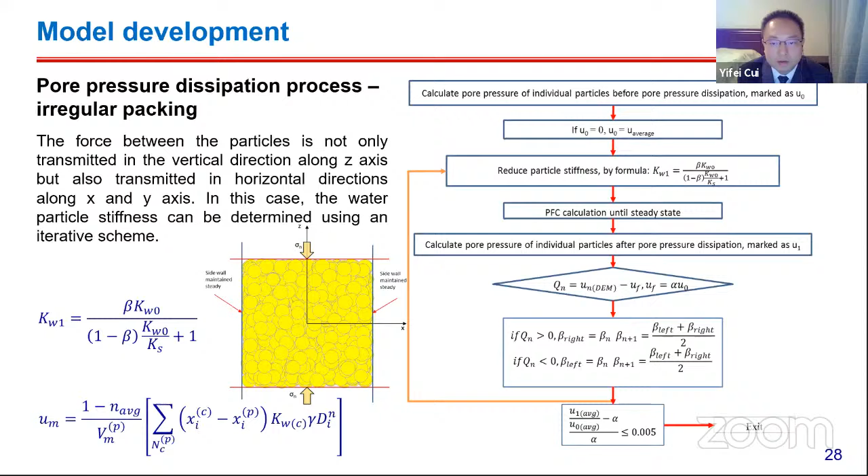For the numerical verification of the undrained triaxial compression case, the model generation and test procedure follow the same procedure as the isotropic compression case. The results of the isotropic and triaxial compression tests show good agreement between the analytic and numerical solutions.

The analytic solution for the Terzaghi 1D consolidation test can be calculated by considering a half drain layer. The excess pore pressure at any distance from the drain layer is calculated from the drainage path and time factor. The final 1D consolidation settlement of the whole soil layer is calculated based on the change in effective stress

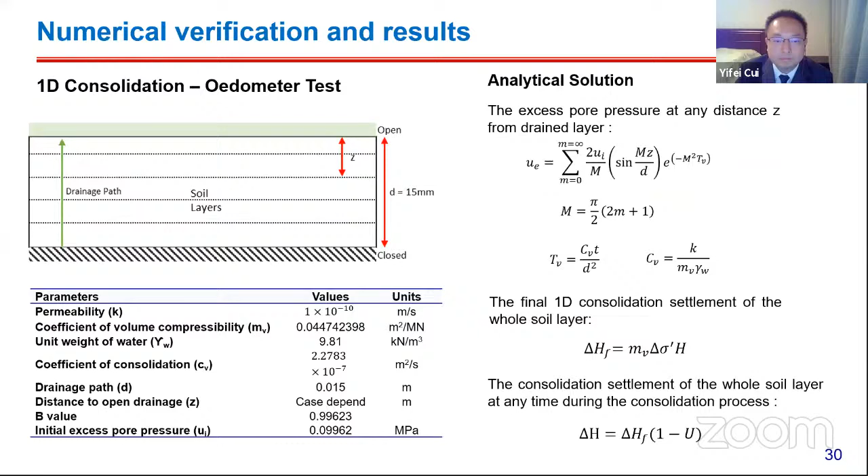and the coefficient of volume compressibility from the DEM dry case. During the drain condition, the water particle stiffness is reduced from the maximum value to zero corresponding to the pore pressure dissipation. The difference in pore pressure along each layer in the analytic solution will result in different stiffness reduction in the water particles in the DEM.

The consolidation settlement of the whole soil layer is calculated by the wall displacement. The comparison of the excess pore pressure drop in each layer between the DEM and analytic solution is shown here. The last figure shows the comparison of the consolidation settlement of the whole soil sample against the time increment between the analytic and DEM solution. Both show good agreement.

Let's talk about another solid fluid coupling development during the flow-driven condition. The continuity equation for the fluid flow is expressed as the difference between the entering and exiting mass being equal to the accumulated mass. By combining Darcy's equation and compressibility, the fluid pressure can be solved at the grid point of the superimposed mesh element.

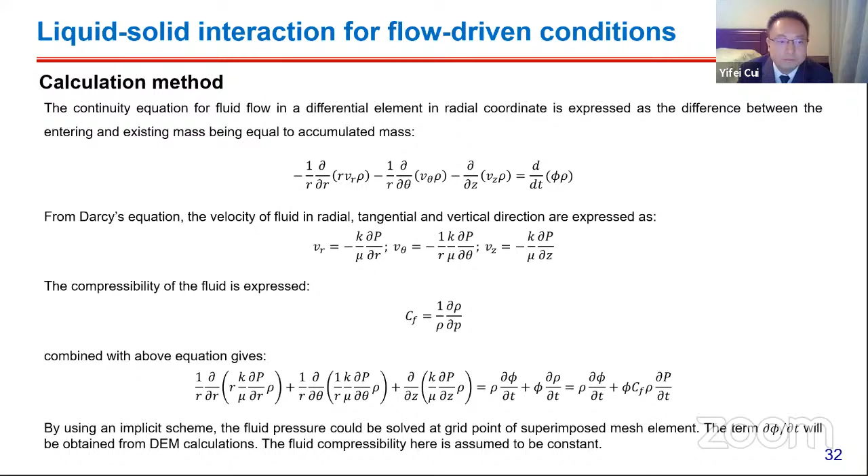The fluid compressibility here is assumed to be constant. The fluid force calculation method adopted here assumes a continuum where the size of the grid block for the flow calculation is relatively large compared to the average particle diameter. A shape function is used to interpolate pore pressure at any point inside the grid block from the calculated nodal pressure in the cylindrical coordinate system.

The fluid force applied on each particle in the fluid cell is calculated by the integration method of the pressure at any point of the pore surface and area of the pore.

To update the permeability, we determine the number of particles in the measurement sphere at the beginning and end of each time step to track the particle movement. If the number of particles at the beginning is found to be equal or smaller than the number of particles at the end of the time step, no sanding is assumed from that volume.

In this case, the permeability is updated based on the volumetric strain using a modified version of the Kozeny-Carman equation. If the number of particles at the beginning is found to be larger than the number of particles at the end of the time step, the permeability is updated based on measured porosity.

If the porosity measured in this block is smaller than 0.85, the permeability is interpolated between the original permeability and an upper bound value. If the porosity exceeds 0.85, the grid block is assumed to be fully sanded. In this case, the permeability is assigned as 100 Darcy.

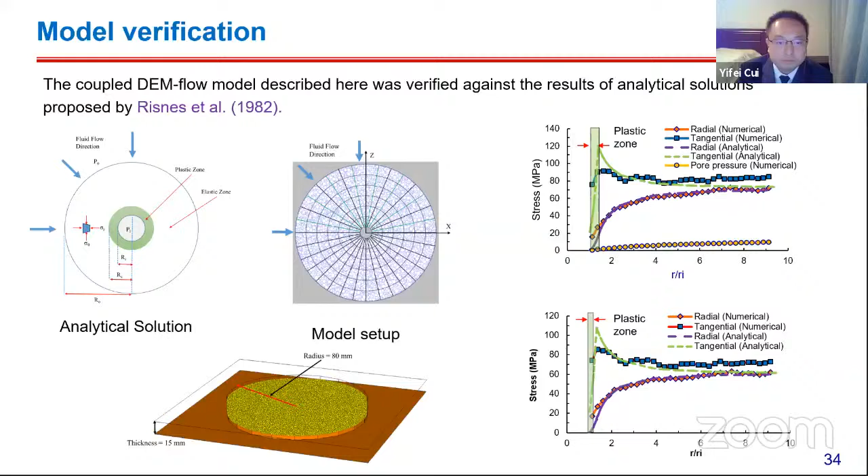We studied the effect of boundary effective stress and pressure on sandstone degradation and sanding. Here, two cases were considered: one with the horizontal effective stress equal to 60 MPa, another with the maximum and minimum horizontal stress equal to 60 and 30 MPa. In both cases, the outer boundary pore pressure was kept constant at 10 MPa.

We also simulated a synthetic sanding test on the hollow block sample. In the simulations, the outer boundary effective stress was increased gradually. Within each boundary effective stress increment, the fluid pressure had a step rate increase. The left figure indicates the onset of sanding at the outer boundary effective stress of 50 MPa, and massive sanding occurs when the outer boundary effective stress and pressure reached 58 and 20 MPa.

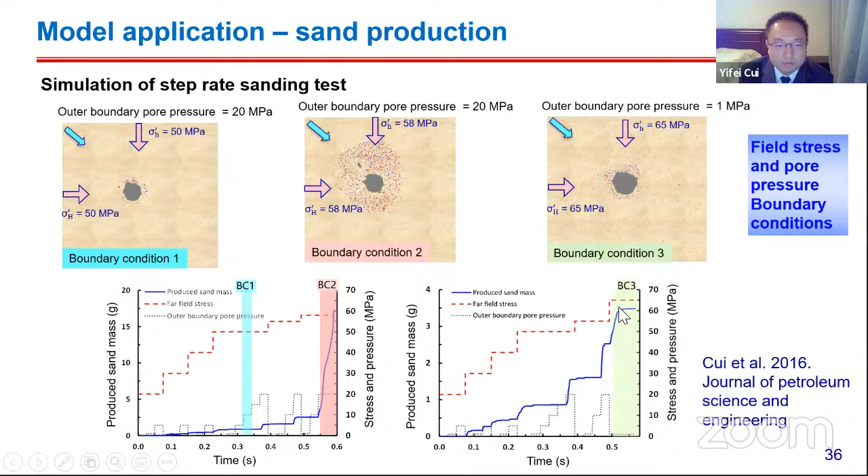The study area is fully covered by loose landslide material, which has high potential for subsequent debris flow under heavy rainfall. The table here describes the geomorphology based on different Earth surface processes and basic soil properties from the particle size distribution.

We use the serial tomographic method, known as the ST method, based on SEM analysis to characterize the pore structure in the study. The samples are well prepared with epoxy impregnation to protect the micropore structure before going to the SEM scanning. After each scan, we will trim 50 micrometers of soil along the depth direction using a grinder.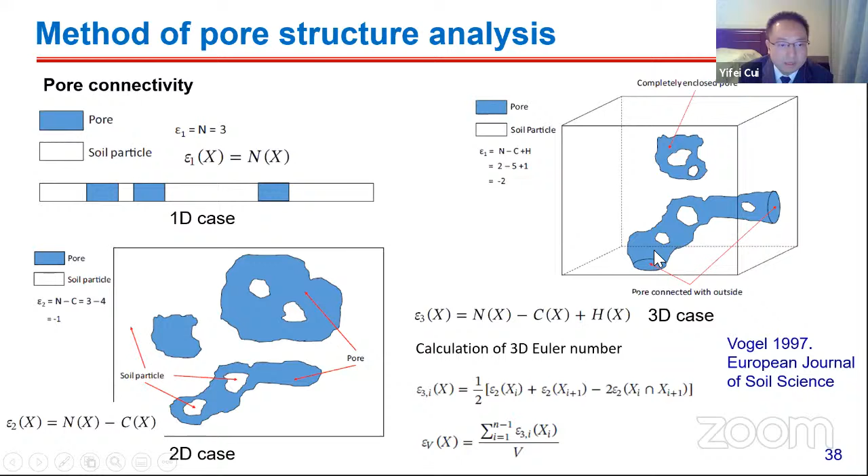From previous literature, pores larger than 12 micrometers were classified as micropores, meaning fluid flow is unlikely. So the number of pores and their size influence the mechanical response of the soil, especially when there is an overwhelming high number of large pores larger than 1,000 micrometers.

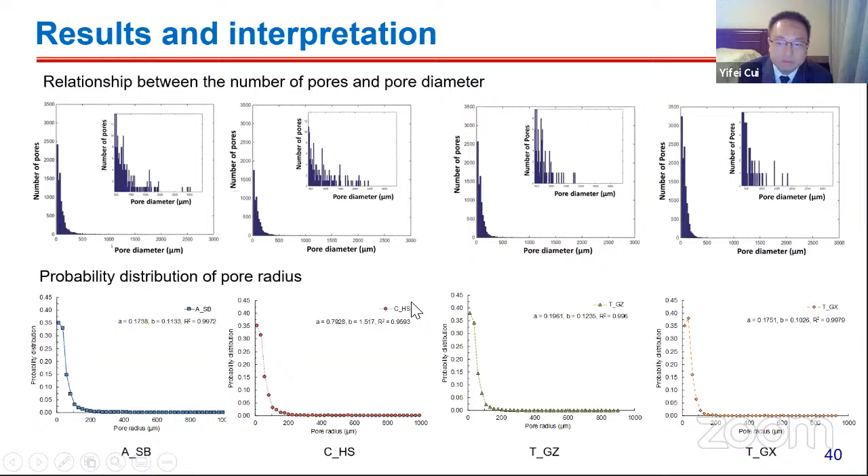During the sampling, the y direction was denoted as the downslope along the slope surface. The pore frequency was then obtained by dividing the index by the total number of pixels occupied by the pore in each soil sample.

To further illustrate the pore distribution in 2D space, we apply a statistical approach based on superposition in the x and y directions. This figure shows the pore frequency distribution in the x direction. Compared with the 3 other samples, the distribution frequency of sample ASB reflects a relatively large pore concentration when x is larger than 3 and smaller than 5. We also find that the pore distribution frequency increased sharply in the y direction, with some variation, when y is larger than 8 millimeters.

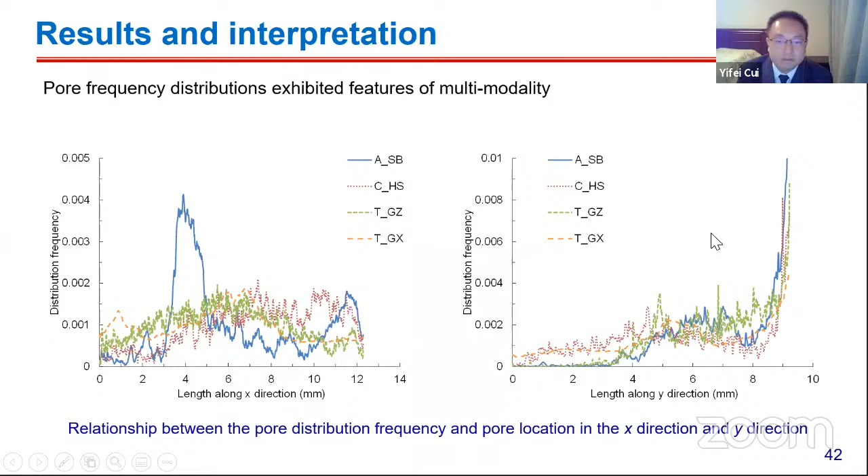Here we develop a new dimensionless number, NC, to represent pore complexity. NC ranges from 0 to 1. A high NC indicates that the shape of the pore is close to a circle, and a low NC indicates that the pore has high complexity. It was observed that the pore complexity of all samples remained above 0.75, which suggests higher circularity and low aspect ratio of each pore.

We compare the pore size distribution of the widely graded loose soil samples (WGLS) with the loess data. Those samples are prepared with the same method. We can see that the pore size distribution of the WGLS is significantly different from the loess. The loess pore size distribution shows a normal distribution with a single peak at 13 micrometers. In contrast, the WGLS pore size distribution shows a double peak at 12 and 72 micrometers.

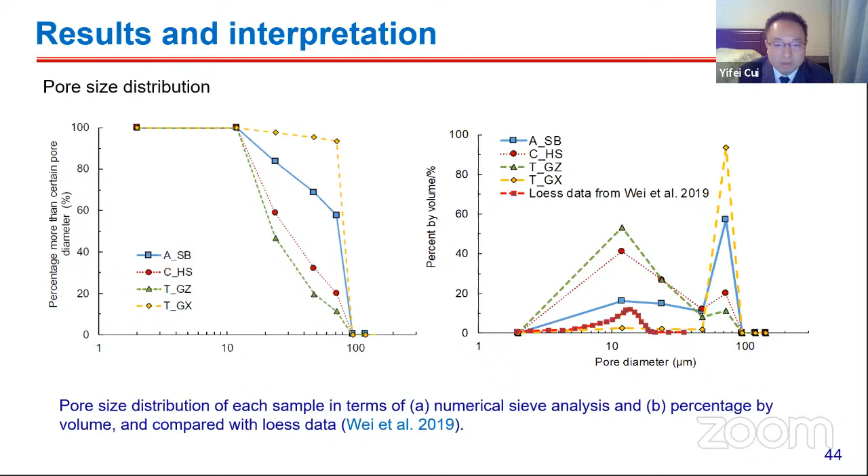Compared with the bimodal pore size distribution of the silty soil and sand from previous literature, the WGLS also corresponded to a second peak with a larger diameter. This is attributed to the widely graded characteristic of particle size distribution in a coarse soil skeleton that forms more macropores. However, the CT method we used here is not able to capture the peak pore with a diameter smaller than 2 micrometers, so we cannot get any information from them.

We identified that the size of the migrated fine particles from the soil tongue after rainfall was smaller than 2 millimeters from the test. We know this size only serves as the upper boundary. So in order to obtain the exact D50 of the migrated fine particles, we conducted a 1D column CPT test, and the experimental apparatus is shown here. We found that the D50 of the migrated fine particle, averaged from 4 samples, was 0.015 millimeter.

For the jamming analysis, we simplified the model and assumed the soil was in a fully saturated state for calculating the jamming probability of each sample. The fluid was assumed to flow continuously along the channel by pores. The fine particles were transported by the effect of fluid flow. The discharge velocity of fine particles passing through a specific pore is significantly related to particle and pore size.

The flow rate of the grain through a hole was first assessed using Beverloo's law in 1961. But soon after that, the literature found that Beverloo's law is not applicable when small holes exist. So the flow rate calculation is then adjusted based on the experimental observations from Janda et al. 2012.

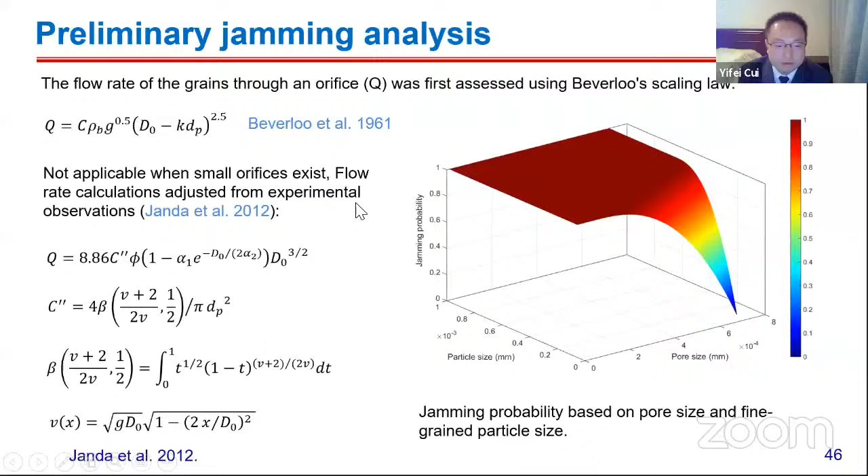The jamming probability of the 4 study samples was then calculated using a regular square mesh at each size. The chosen mesh size was 1.6 times larger than the maximum pore diameter, and the calculation is based on the average migrated fine particle size of 0.015 millimeter from the CPT test.

The results show that jamming will be most prevalent along the downslope direction, attributed to the relatively smaller distribution of pores in terms of pore size and number near the bottom of the slope. So the average jamming probability downslope for the 4 samples is actually 2 times greater than the upper slope.

The influence of the average pore complexity and the 3D Euler number on the average jamming probability of each sample is shown here. We can find a linear relationship between the average jamming probability and the 3D Euler number, but the influence from pore complexity was mainly quantified independently. So a more systematic investigation with more samples is required.

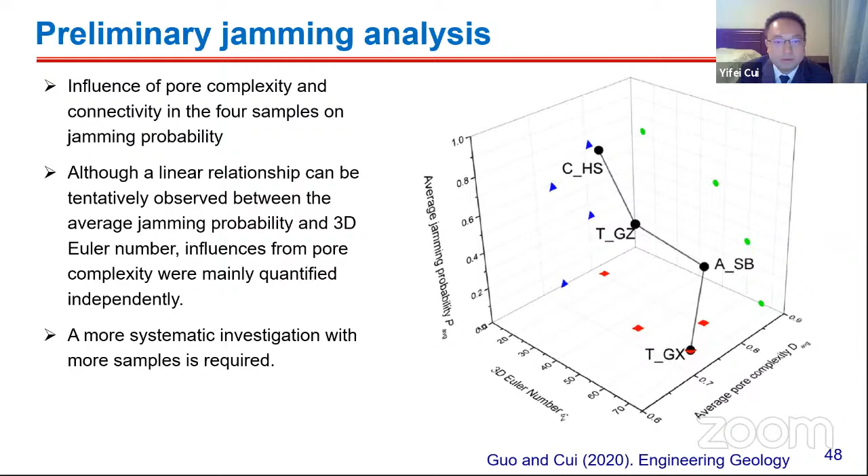From the previous slide, we analyzed the fine particle migration and jamming probability based on the analytic method, and this method has several assumptions and does not consider the effect of fluid flow. So to characterize the effect of pore size distribution on the fine particle migration process in each different sample, we replace each pore diameter from the pore size distribution with its mean value.

The fine particle diameter together with the pore size will then be expanded 20 times to improve calculation efficiency, but we maintain the same Reynolds number to minimize the scale effect. Here we only show 1 layer of the pore structure, and for simplification, we construct a 1D pore structure using the DEM rigid element and distribute it according to the pore size distribution in this study. The LBM was used to solve the fluid motion process in the fluid-structure interaction, and DEM is used to simulate the fine particle migration under the effect of fluid flow.

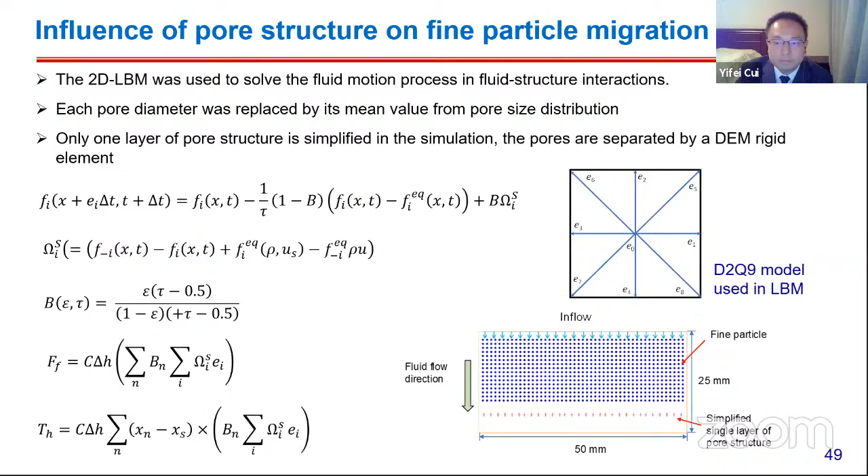The results of the 3 different samples are shown at 2 distinct times, 0.08 and 0.26. It is observed that the fluid initially causes downstream migration of fine particles. Then there's an interaction of particles and pores, resulting in the jamming effect and subsequent arching formation of fine particles that significantly affect the fluid field.

The blocking ratio at the beginning is around 0.4, and this value becomes really, really low at the end.

We can see that sample T_GZ is found to have the highest jamming probability, while sample A has the lowest jamming probability. This follows the pore size distribution, meaning sample A is dominated by the second peak, while sample TGZ is dominated by the first peak. The same observation is also found from the analytic jamming analysis using the modified version of Beverloo's law.

Since the CT method is not able to capture the peak pores with small diameters, we performed a series of one-dimensional soil seepage tests by controlling the coarse to fine particle size ratio, and then used the CT scan method to obtain the particle distribution and 3D pore structures.

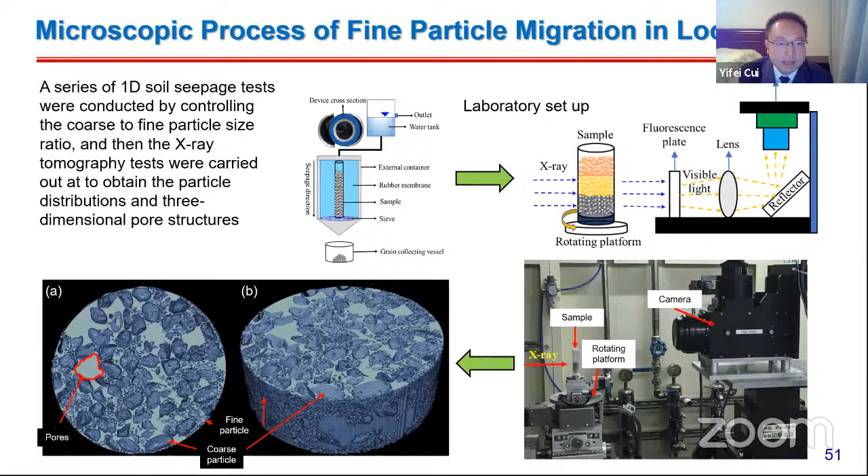We divide the CT result into two groups based on the coarse particle size difference. The left shows that fine particle migration starts from the top to the bottom. However, the right side shows that fine particle migration starts from the bottom to the top.

This is mainly due to the relatively small size of the pore channel formed by the relatively small coarse particles, while many fine particles present in the channel further reduce the particle transport space, thus eroding the bottom particles so the upper fine particles have sufficient transport channel, and other particles are then transported. It is really interesting to also do this kind of analysis in numerical simulation.

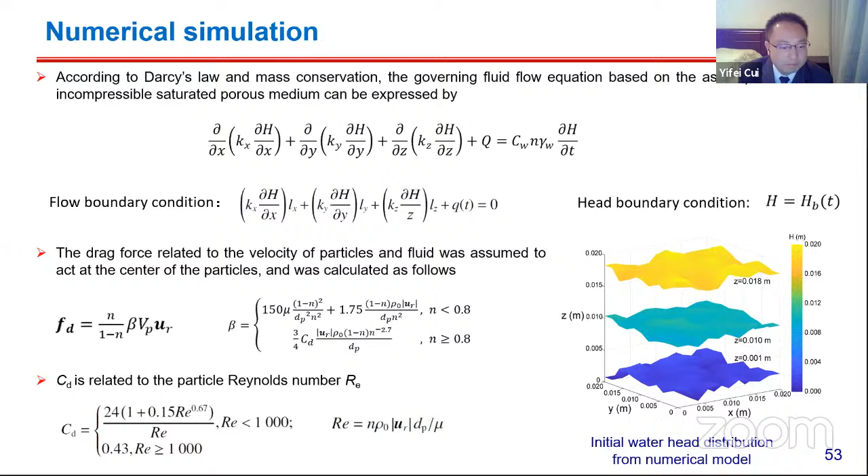Here we can see that under the action of the fluid, fine particles move along the pore channel in the seepage direction. At the end of the test, the coarse particles locally displaced and rotated slightly, and part of the fine particles were eroded away and even flowed out, resulting in the formation of large holes in the soil samples.

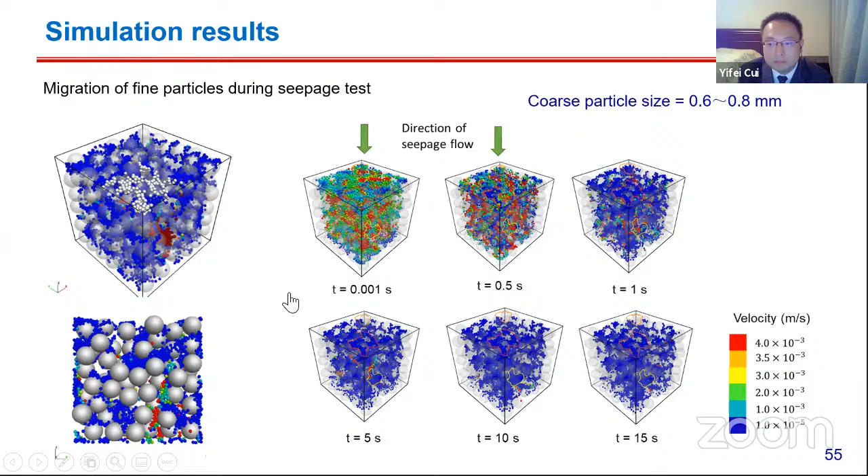By comparison of the CT and numerical results, we observed that the fine particles located at the upper part were eroded, especially in the middle, because relatively less energy of the fluid was consumed there. The fine particles in the middle of the sample were eroded less due to particle supply from the upper region, but there are relatively fewer particles in the middle of the numerical result due to the large space of migration.

The relatively numerous fine particles located at the bottom were eroded, especially in simulation, due to the lack of particle supply from the upper part. The results of CT and numerical calculations revealed perforation erosion in the inflow and outflow regions of the soil sample. We also observed a clogging area with slow fine particle velocity or even zero velocity. Therefore, we chose two zones to monitor fine particle migration.

We use the average kinetic energy as an indicator of the monitored zone. When the numerical simulation reached 2.5 seconds, we saw that 37% and 32% of the fine particles had been eroded in the above two regions.

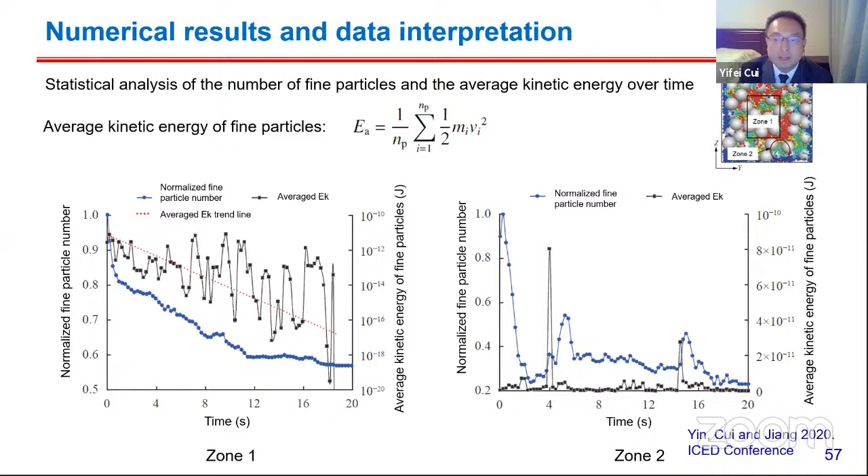On one hand, the forming of long-term clogging or jamming to the flow channels is reflected by the decreasing average kinetic energy and quantity of fine particles with time. On the other hand, temporal jamming to the flow channels is reflected by the rate of increase of the number of fine particles in the measurement region, rather than the rate of increase of average kinetic energy.

Here I'll give a brief conclusion and recommendation for the current study.

A quantitative analysis of the relationship between the micropore structure and mechanical behavior needs to combine traditional geotechnical experiments with pore structure analysis from a microscopic point of view. Further laboratory triaxial tests of fine particle migration and undrained shear tests need to be carried out to understand the influence of fine particle migration on pore pressure and soil stress.

The use of discrete element method in the simulation of sanding poses a serious deficiency, as the application of the particle method to large-scale problems is currently difficult. The restriction of DEM in simulation of large-scale problems can be reduced by blending continuum and DEM models. When dealing with wide-grade soil, the current fluid mesh dependent drag force calculation does not capture particles of various sizes.

It is recommended to use the semi-resolved DEM fluid flow model to precisely calculate this in the future. It is also suggested to consider the influence of the pore structure and pore aperture distribution, and reconstruct the pore structure in 3D to provide a theoretical basis for numerical simulation.

Here are the publications related to the current study, and here are the references related to the current presentation. Thank you so much.

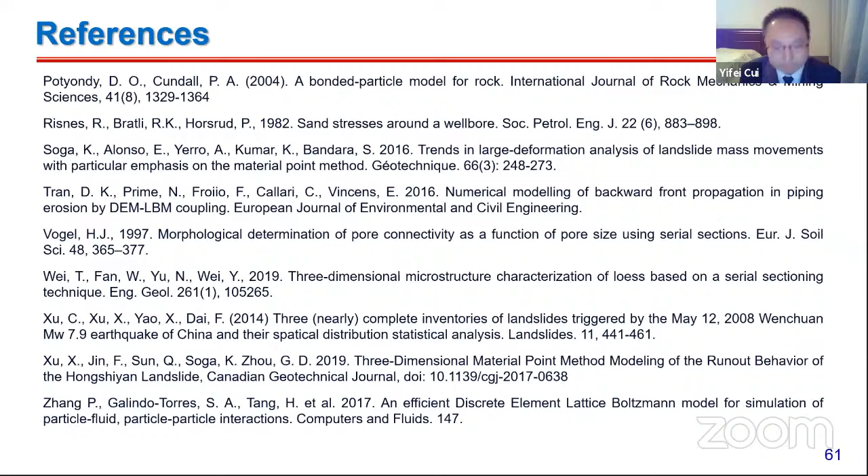Thank you, Professor Cui. That was an excellent presentation based on the work you have done on numerical modeling on soils. There are a couple of questions, so let's start with the first one: is there any relationship between material pore distribution and conductivity or resistivity?

Sorry, can you repeat the question? One of our attendees is asking, is there any relationship between material pore distribution and conductivity or resistivity?

Yes, there is some kind of relationship between material pore distribution and hydraulic conductivity. This relationship has been studied in the past decade by many researchers, not only for soil but also for rock and other materials. To study this relationship, we need to use some kind of index to quantify the pore structures. For example, if we focus on quantifying the shape of coarse particles, we have two indices: one for shape and one for roughness. But to quantify the pore structure itself is more complex, because for pore structure we have connectivity and we have tortuosity.